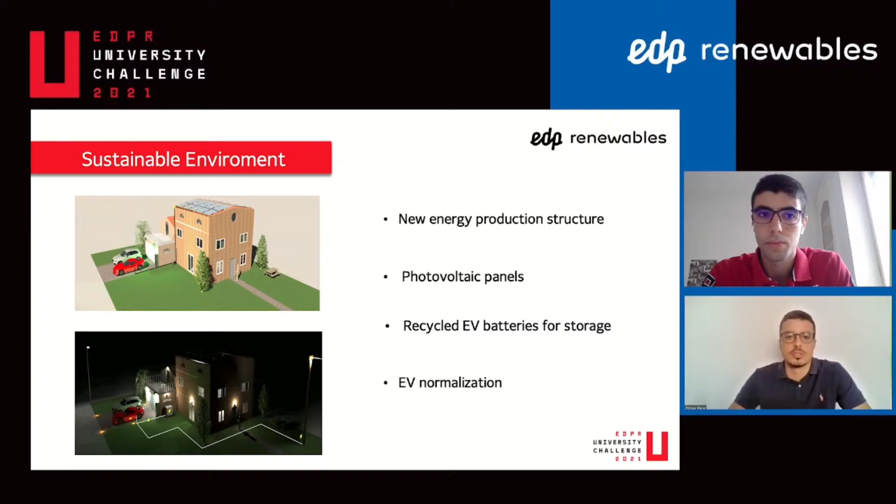Everyone, we are Javier Vázquez and Alonso Mena, students of Electronics Engineering and Marketing, and we are presenting our Smart EV Charger. First, this fits into the context of the growing market of renewable energy and electric vehicles. Our proposal is a new type of EV charger with capability to manage renewable energy and energy from the utility company, such as EDP. The system is also ready to incorporate an energy storage system, especially once recycled EV batteries penetrate the market.

This prototype has already been built and tested, and the hardware is ready to handle up to 2 EVs using different control strategies. The user can set the maximum power, up to 7.4 kilowatts, or decide to charge the vehicles with energy generated by solar panels. The user could also program the time period to charge, taking advantage of cheaper energy costs at night, for example. More complex solutions can also be developed in the field of Internet of Energy, like taking energy only from the home battery or limiting power according to the utility's preferences.

All these possibilities can be programmed with an interface panel at home. With this interface, the user can not only program the charge but also see the energy and power flow of the house. Communication between the charger and the interface is done via Wi-Fi through MQTT protocol. With this system, we can also measure and store user information in a database compatible with big data strategies. Our interface is already developed and running a demonstration program, with communication between the MQTT broker and the microcontroller of the charger.

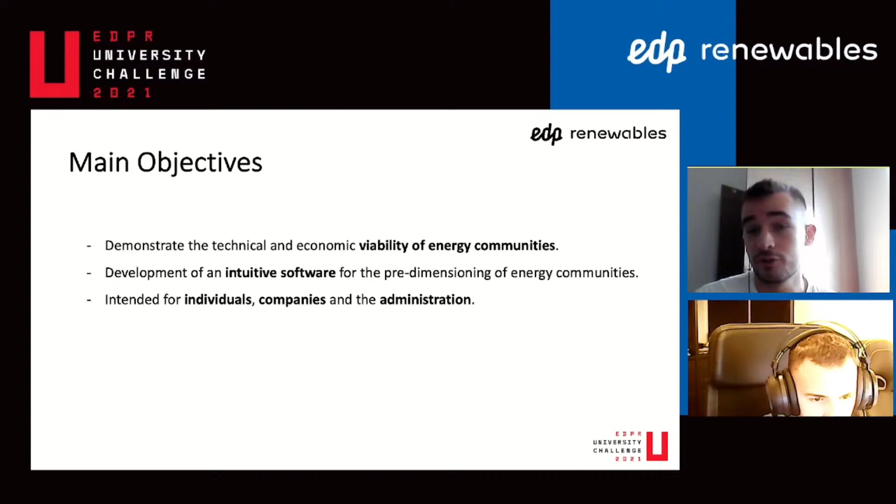ENCOM is programmed in the MATLAB environment, which allows generating a PDF report with the most significant energy and economic results from simple and intuitive data entry. The result report also provides data on the environmental benefits of implementing the energy community. This software is now applicable in Spain, on the Peninsular Territory and the Balearic Islands. The main objective is to minimize the payback years of the design of an energy community by optimizing the photovoltaic and storage system.

It's been possible to demonstrate through the software that implementing energy communities with a solar fraction of around 20% results in amortization years below the life of the installation, at least in situations without a storage system. The factors that most influence the variability of these amortization years are the location due to solar resource and climate, the price of energy, and efficiency strategies in consumption. For communities with a storage system, this currently represents a very high cost per unit of stored energy, which is one of the points for improvement in the future.

In the end, ENCOM software can be used by all people who want to join energy projects around an energy community, providing them with a simple and intuitive tool to check the energy and economic viability of these kinds of projects. Thank you very much.

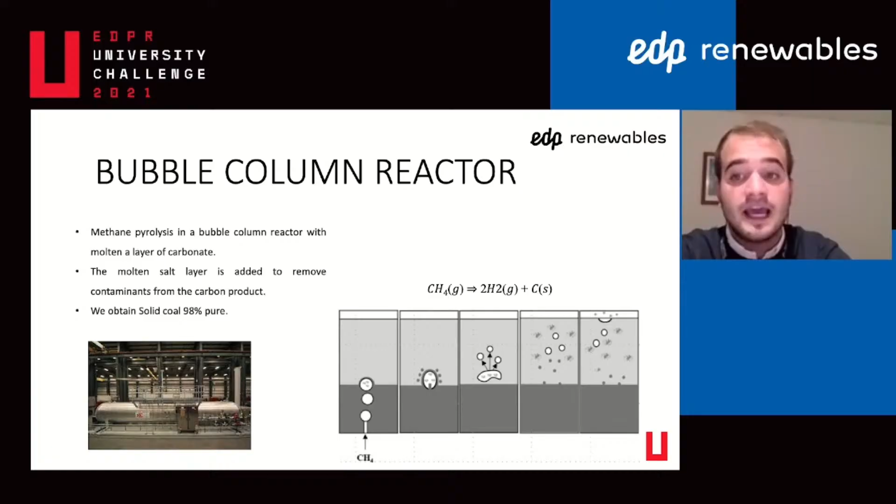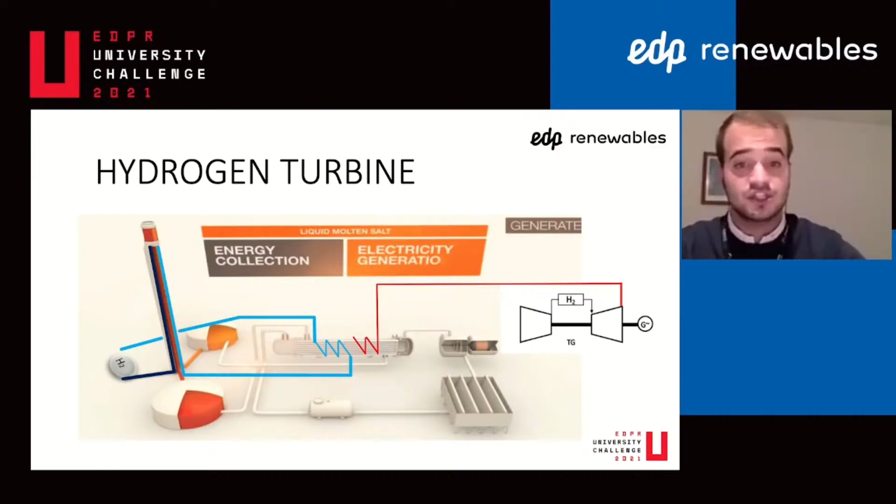To produce the hydrogen, the new plant scheme adds this new technology: the hydrogen connection with a tube-shell exchanger, and then the hydrogen turbine. We're also adding a hydrogen turbine to the system. With the hydrogen we produce, we can use it for 24/7 usage. This would be the new scheme with the hydrogen production and the new gas turbine.

In conclusion, we're producing hydrogen and carbon, coal.

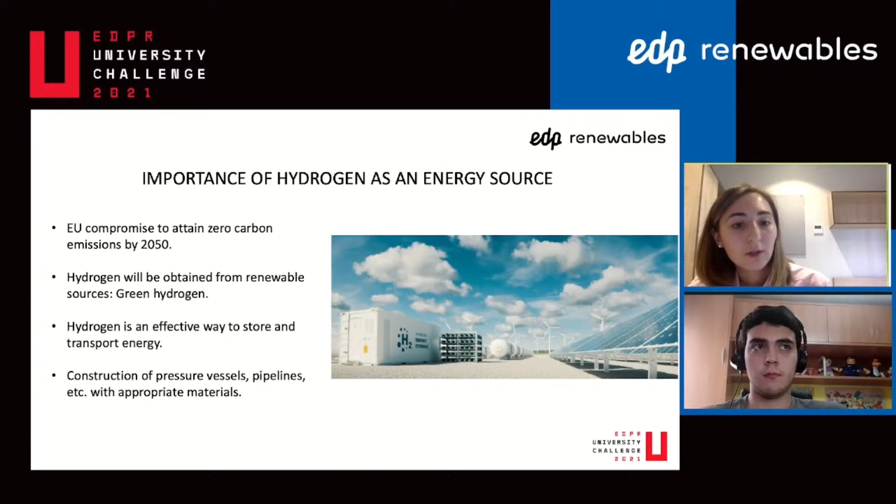This work was performed at the University of Oviedo. The European Union has decided to attain zero carbon emissions by 2050, and green hydrogen obtained from renewable sources will help achieve this goal. In this context, infrastructures to store and transport hydrogen must be constructed with appropriate materials.

Hydrogen atoms enter the structure of steel when it is submitted to high hydrogen pressure. They diffuse and accumulate in certain microstructural regions, giving rise to brittle failure under low stresses. Steels used to store hydrogen may need to be mechanically characterized in the presence of hydrogen.

There are different ways to introduce hydrogen into steels. One way is in-situ hydrogen charging tests under high pressure, but these are very expensive and only a few testing facilities exist. Another way could be performing mechanical tests on hydrogen pre-charged specimens, but these tests gave non-conservative results.

So we propose to perform in-situ tests using electrochemical hydrogen charging in an acid solution. Hydrogen content can be precisely controlled by means of the cathodic current density.

The qualification procedure for steels that work under high hydrogen pressures follows these steps. First, hydrogen saturation in the steel under the study pressure may be determined. Then the cathodic current density that introduces the exact same hydrogen content may be found. Finally, the selected mechanical test with simultaneous hydrogen charging under such conditions may be performed.

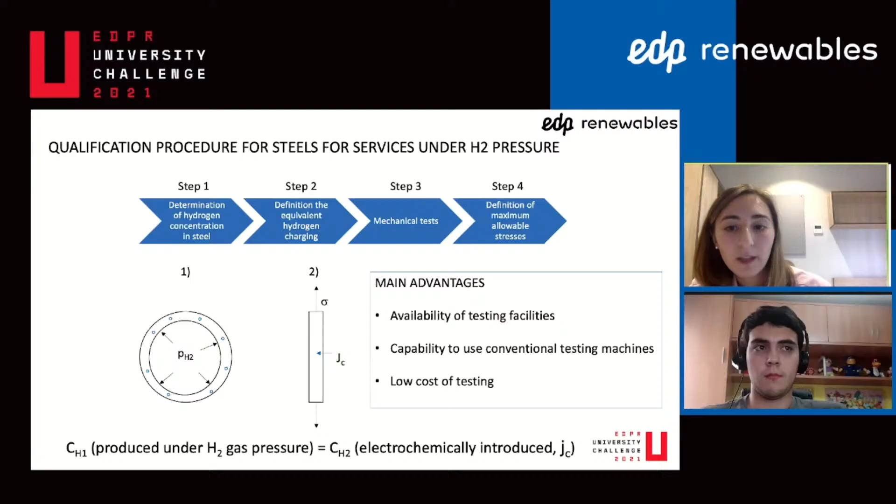Maximum admissible stress levels are determined. This operative procedure has low costs and is readily available, as it uses only conventional testing machines. Thank you.

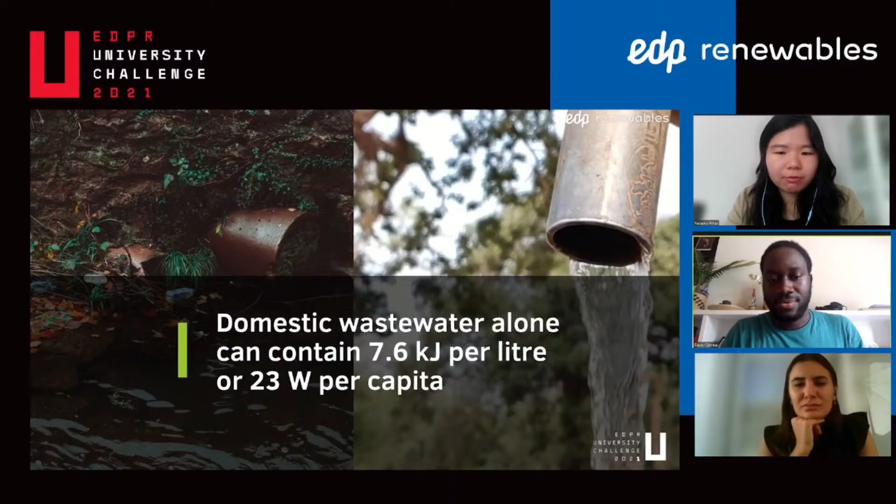They say renewable energy is the future, yet their intermittent nature and the difficulty to switch completely to electricity make them not perfect. Hydrogen is a clean energy vector that can support the transition into renewables, but our capacity is far behind our demand. On the other hand, we have an abundance of wastewater. It has been estimated that for every liter of domestic wastewater, up to 7.6 kilojoules of energy can be obtained.

We need sustainable ways to tap into this gold mine for the energy transition. Mother Nature provides us with a solution: microbes that break down organic sugars, releasing electric charge and hydrogen ions. In an electrolytic cell, with air as the cathode, the hydrogen ions recombine to create clean water. This is the microbial fuel cell.

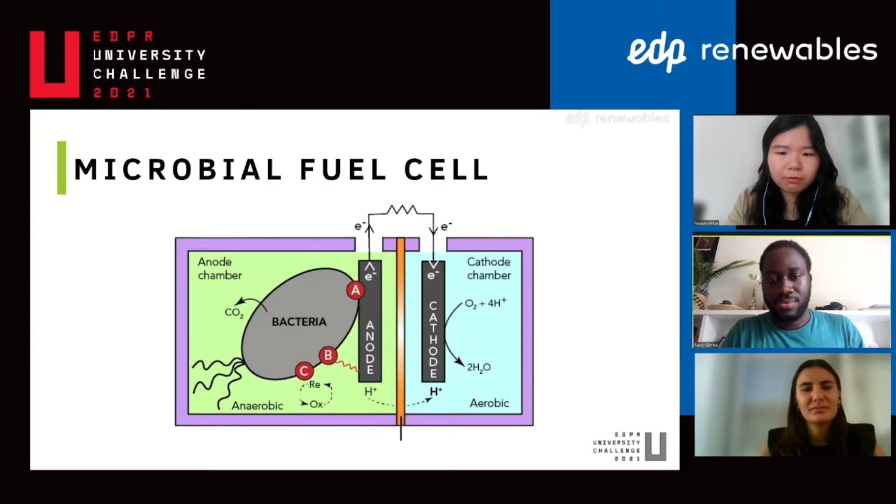Modifying this cell to trap hydrogen from the hydrogen ions creates a microbial electrolytic cell, an alternative to conventional electrolyzers, but this requires some additional electrical power.

Compared to worldwide utilities, our unique solution uses a combination of microbial fuel and electrolytic cells to produce green hydrogen from wastewater. The fuel cell provides the energy for hydrogen generation, making it completely energy independent.

This innovative characteristic allows us to reduce CO2 emissions, empower people through clean water production, and provide cheaper green hydrogen production. This is where EDP can participate in the hydrogen economy with lower capital and operating costs.

How do we know this? Our feasibility study shows that by selling the generated hydrogen, we get a payback of 6 years with an IRR of 9%. Also, the market has few competitors and is expected to grow to $18 million in 2025.

Together with us, this is the right moment for EDP to act and establish itself as the pioneer for waste hydrogen.

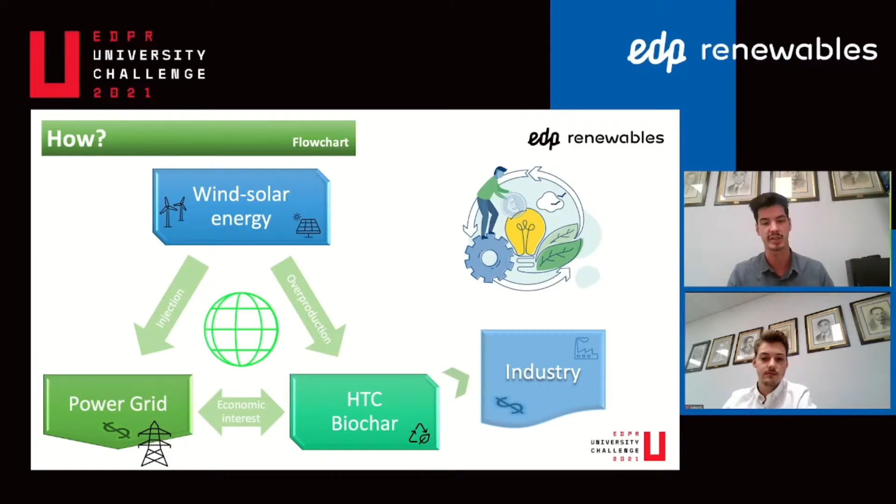The basis of the project is to support green energy and the circular economy without neglecting the environmental and social impact, providing maximum efficiency in all fields in order to move towards a better future.

With the research work, we conclude, we promote novel research lines tied to our innovative ideas and create a new viable business, both by improving the actual system and opening new horizons, always looking at minimum environmental impact and maximum land use sustainability. The solution boosts the local society and business and reduces external energy dependency, considering electricity prices nowadays.

As energy engineers, we acknowledge EDP's commitment to renewable energy and sustainability. We propose a solution to contribute to renewable energy share, knowing the future demands and the ongoing electricity dependency of society, especially as green produced electricity.

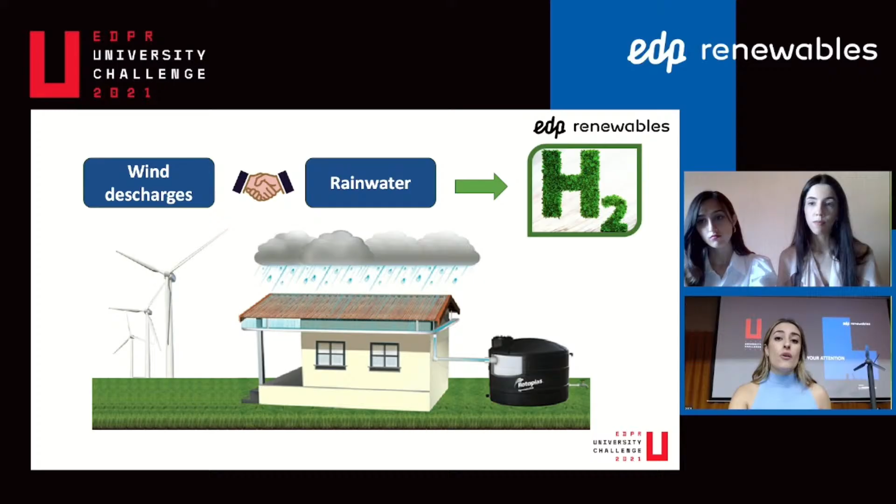Rainwater will be recollected in a building roof and stored in tanks. The wind energy excess is going to be used to produce the electrolysis process. This is how we are going to produce green hydrogen at a lower cost. We truly believe that our project is capable enough to be carried out in a short period of time with low investment and, of course, with incredible profit opportunities. Thank you for your attention.

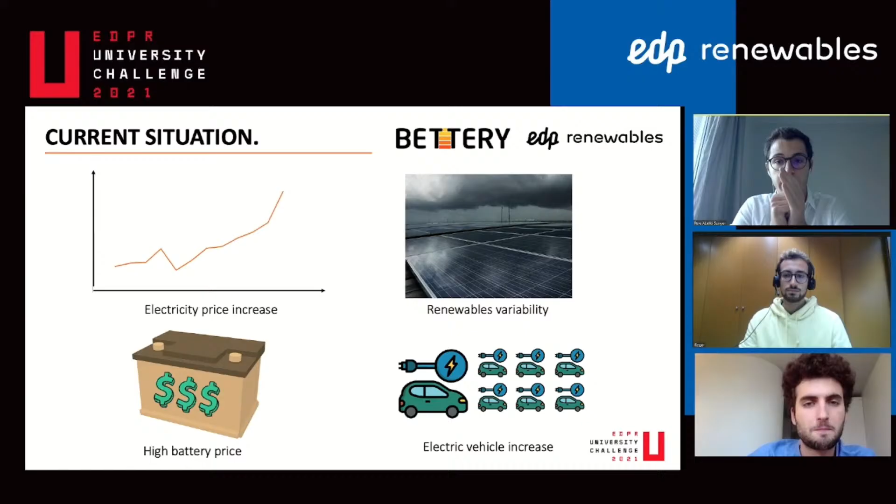We, the Bettery team, want to present to you an innovative method for taking advantage of the increasing renewable energy variability and the growing amount of electric vehicles on our roads. Listen carefully, because your electricity bill is about to get cheaper.

From Bettery, we're going to make all of this possible by means of this extremely simple business model. Investments will be made into purchasing and repurposing used electric car batteries that will be installed into our customers' households with no upfront costs. They will save on their bills by always consuming the cheapest electricity and will repay us via a monthly subscription fee.

Finally, leveraging our installed capacity in the form of a virtual power plant, the grid operators will be paying for the balancing services that we will be prepared to offer. As you may imagine, everyone is interested in saving money, so the potential battery market is wide. We will firstly be focusing on Spain and Portugal, but without losing sight of the whole European market. This is our team, and thank you very much for your attention.

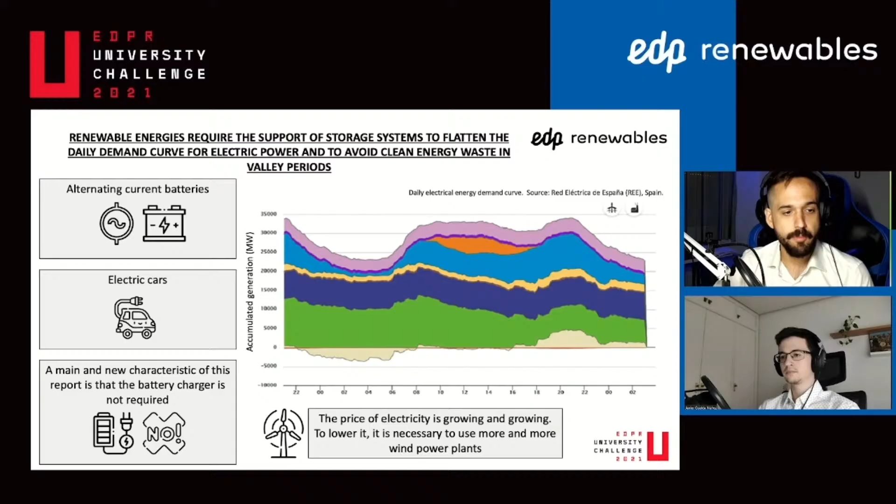Here, a distributed wind power storage system is proposed to avoid this energy loss by using alternating current batteries and also electric cars. A main and new characteristic of this report is that the battery charger is not required. The price of electricity is growing and growing. To lower it, it is necessary to use more and more wind power plants.

Alternating current batteries: an alternating current battery consists of a direct current battery connected to an inverter. During valley hours, the battery is charged at the expense of the network, and during peak hours, it injects energy back into the network again.

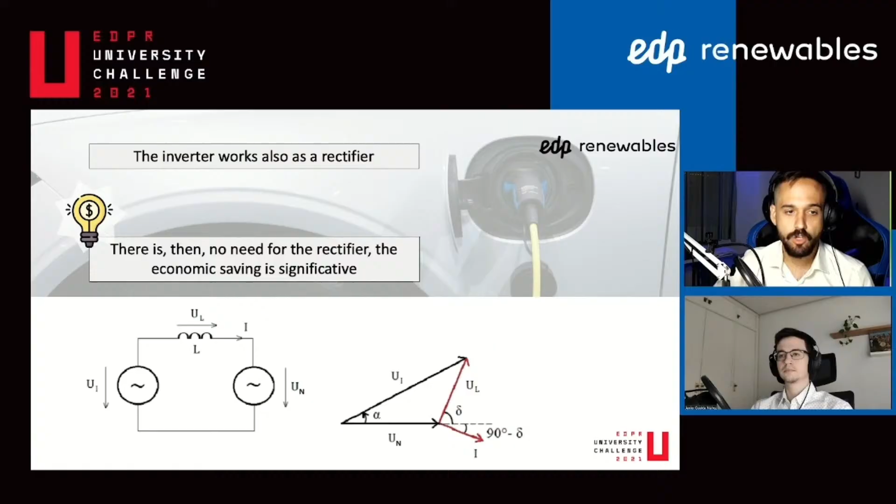Parallel connection: this is the basic scheme along with this phasor diagram. Alpha is the advanced angle of the inverter's voltage with respect to that of the grid. If alpha is greater than 0, the inverter works as such. If alpha is lower than 0, the inverter works as a rectifier. There is then no need for the rectifier. The economic saving is significant.

Implementation plan. The implementation plan is composed of two phases: prototype construction and laboratory testing to check the theoretical basis, and application. Initial promotion with advertising on TV, and the state will implement new electricity rates.

Conclusions. Distributed storage will take place in homes, industries, and shops. For storage, alternating current batteries and electric cars are used. The inverter is also going to work as a rectifier, avoiding the need for the latter. With this storage system for 1 million users, 3.5 power plants of 1,000 megawatts could be avoided.

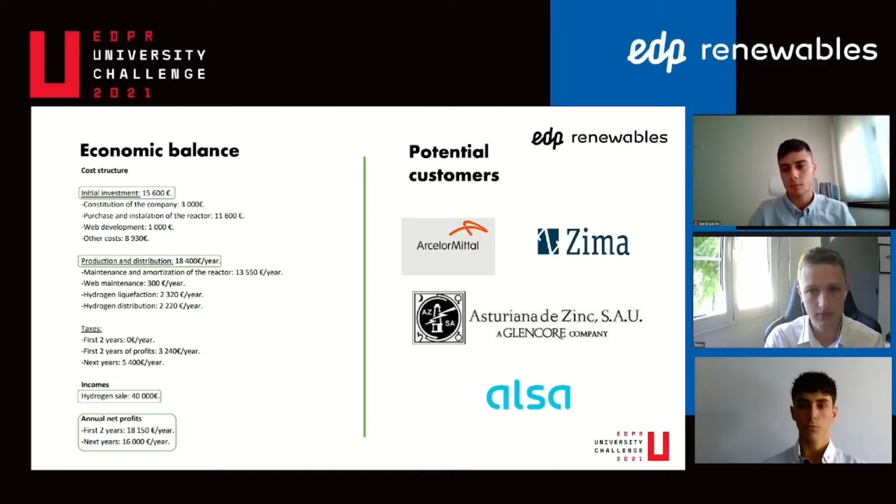Moreover, we would like to say that there are several potential clients that have publicly announced their interest in purchasing this type of energy. To sum up, our project began as a new way of generating green and renewable energy from a cheap and abundant type of waste, which currently has no productive use.

It requires a relatively low initial investment with a short payback period, and it would result in savings for plants. In addition to this, as future perspectives, we would also like to say that this technology could be applied and extended to other parts of our country, generating a greater amount of hydrogen while treating their sludge in a better way. And that's all. Thank you all for your attention.

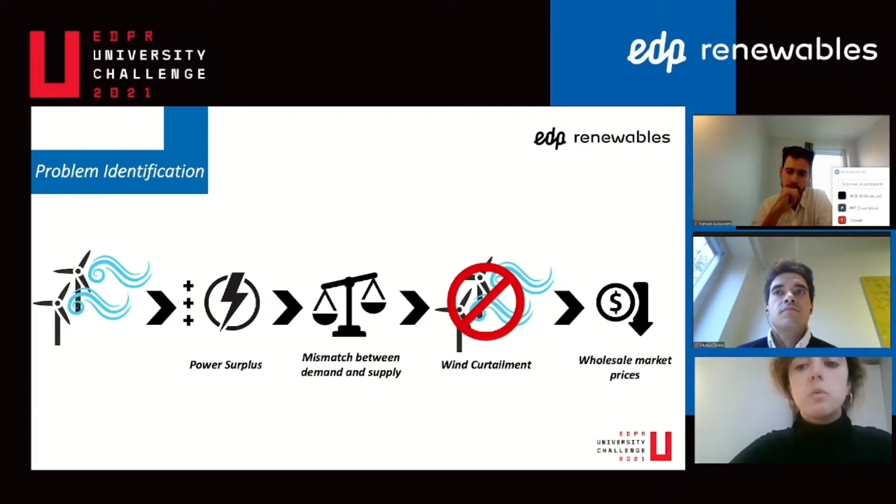The most common scenario is the overproduction of energy, which leads to wind curtailment and a decrease in market prices. Our solution to this problem is a model of a joint offshore wind farm with an alkaline electrolyzer and a solid oxide fuel cell. As such, the surpluses of the wind farm that would otherwise need to be curtailed would be used to produce and store hydrogen with the electrolyzer.

Then this hydrogen would be converted into electricity with the fuel cell when the demand is not satisfied. The model is based on a piece of code that determines when to convert the surplus of energy from the wind farm into hydrogen, and when to convert this stored hydrogen back into electricity.

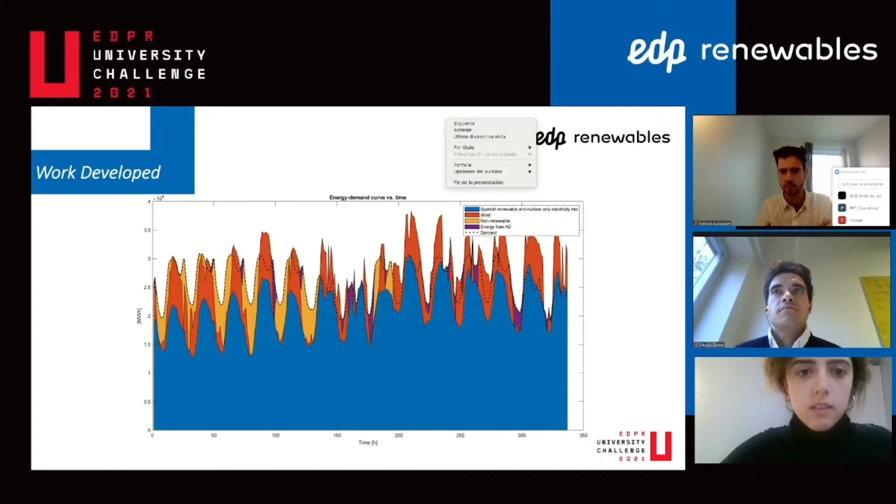Finally, this project will imply an 80% increase of renewables and a 6% decrease of non-renewables in the Spanish electricity mix. Moreover, the two LCOEs prove the economic feasibility of our project. Thank you very much for listening to this presentation.

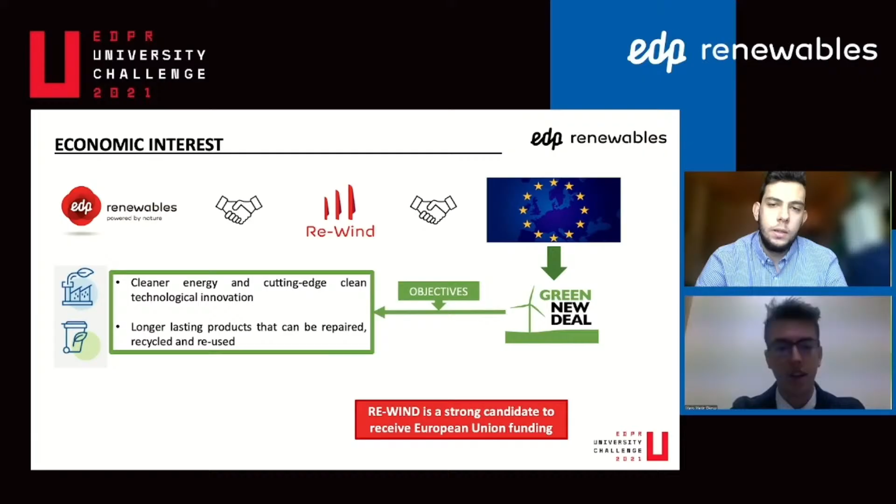Furthermore, this project could create a new market based on a circular economy while being a renewable energy source. Hand in hand with EDP, this project would be a strong candidate to receive European Union funding through the European Green New Deal, because Re-Wind is aligned with their objectives. In this way, we could significantly reduce the research and development costs this project could need. And we want to emphasize that the biggest cost of the project is the opportunity cost of not doing it. Thanks for your attention.

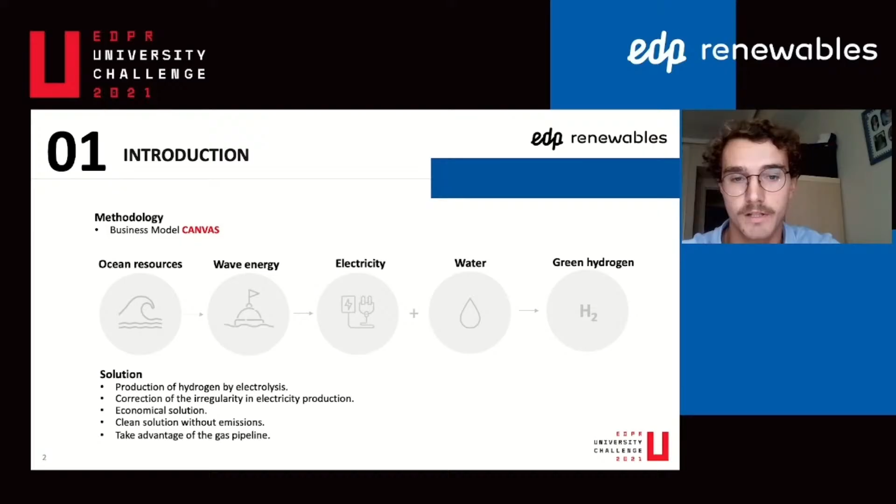So our solution is to use this electricity for the production of green hydrogen. By this, we correct the irregularity in electricity production, and we offer an economical and environmentally friendly solution, and we can take advantage of the gas pipelines to transport the hydrogen.

This is the case study we have done on the coast of Galicia in Spain. We have made an estimation of the annual energy production, taking into consideration the number of buoys, their capacity, their disponibility factor, having a value of 7,190 megawatt hours, that with the electrolysis considered, produces 131 tons per year of hydrogen.

So with this, hydrogen could be used for industrial, transport, portable devices, or large-scale applications. So the project's attraction comes from its competitive price in the market and its low environmental impact. Furthermore, it will improve over time with upcoming investigations, development, and innovation of the technology.

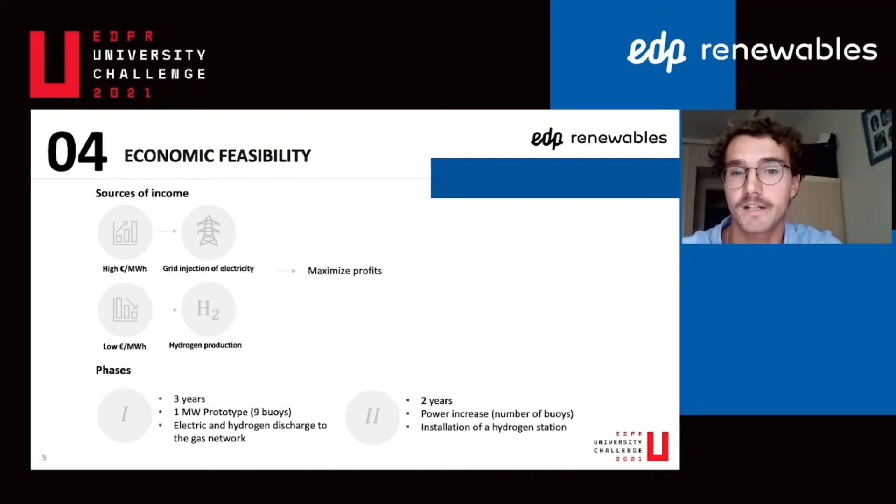In fact, the project is even more profitable when we combine the use of electricity with the production of hydrogen, and for injecting it into the grid depending on the electrical system necessities. We can see as well a prediction of the two implantation phases in 3 and 2 years. Finally, these are our conclusions.

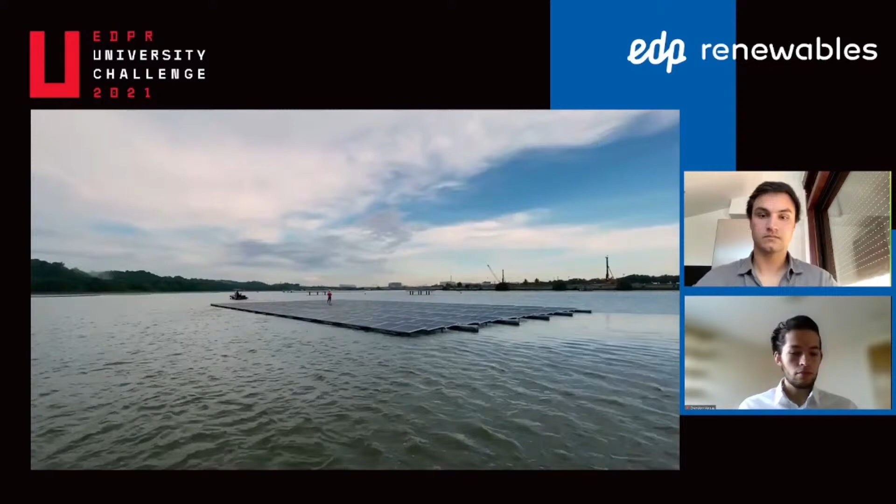A new energy concept is proposed to integrate different renewable energy sources to support net zero carbonization, to accelerate energy transition, and to increase energy system flexibility and sustainability. This innovative solution is a hybrid four renewable energy network, Hy4Ren. In order to have a 100% renewable energy friendly world, we need all renewable energy sources to work together. Hy4Ren combines hydropower and pump storage, floating solar PV, wind power, wave energy, and energy storage in batteries. In this industry, this is a complete game changer. It's the first project of this type in the world. It is completely eco-friendly, modular, scalable, and versatile. Hy4Ren, the best of 4 energy sources.

We are Hy4Ren, and we're here to present our new integrated energy solution. There's no point in presenting a solution as elegant as ours if there's no problem to be solved. We intend to address the biggest issues that we face nowadays: centralization of energy generation, fossil fuel dependency, and the intermittency of energy supply from renewable sources.

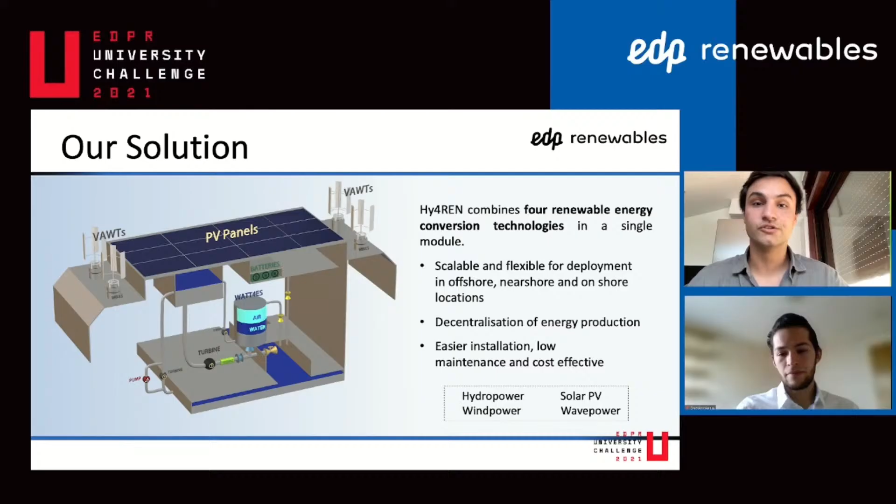As seen in the video, our project consists of a combination of 4 renewable energy conversion technologies. We offer the client a scalable and flexible solution, a low maintenance and cost-effective hybrid solution that allows the user to be fully independent from the grid. Among the several benefits, we highlight the very low investment, the option to decarbonize energy-intensive industries, and also possible applications in desalinization and hydrogen production projects.

We are Hy4Ren, and we want you to help us build the future with this modular solution of today. Thank you.

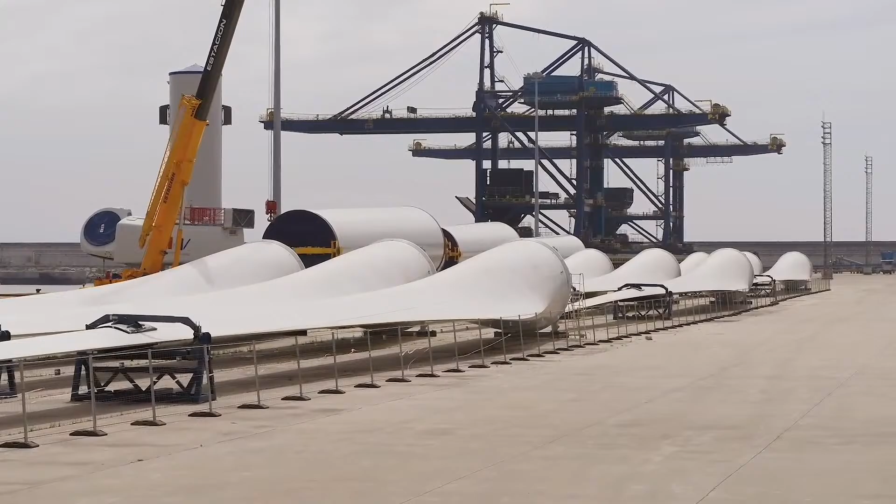The Wind Float Atlantic project, formed by Ocean Winds, Repsol and Principle Power, is the first floating wind farm in continental Europe, just off the coast of Viana do Castelo.

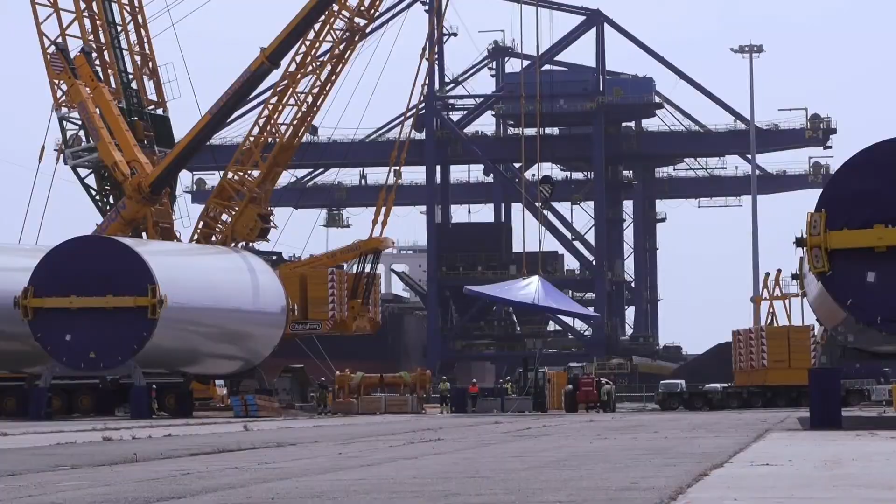This floating wind farm will allow the optimization of natural resources and will speed up the commercial deployment of this innovative technology. Wind Float Atlantic is an example of a more sustainable future for mankind, with the largest turbines ever installed on floating platforms. The total installed capacity of 25 megawatts will provide sufficient energy to 60,000 people throughout the year. This energy promises an endless source.

The potential of wind is immense, and this renewable energy is an essential part of the worldwide decarbonization strategy, free of CO2 emissions. The Wind Float Atlantic project is the future we envision.

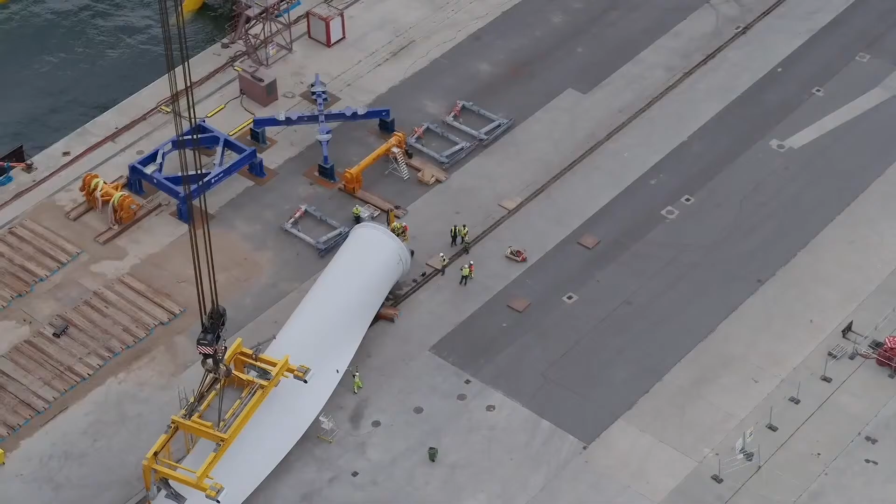Our mission has begun, and we will continue to nurture the power of nature to make our planet more sustainable. This is the beginning of a new era committed to enabling a better future.

Wind Float Atlantic. Energy beyond the horizon.

The world has changed. I feel it in the water. I feel it in the earth. I smell it in the air. A new power is traveling all around the earth. A clean and infinite energy in constant renovation that comes from natural sources such as the sun, the wind, and the human will.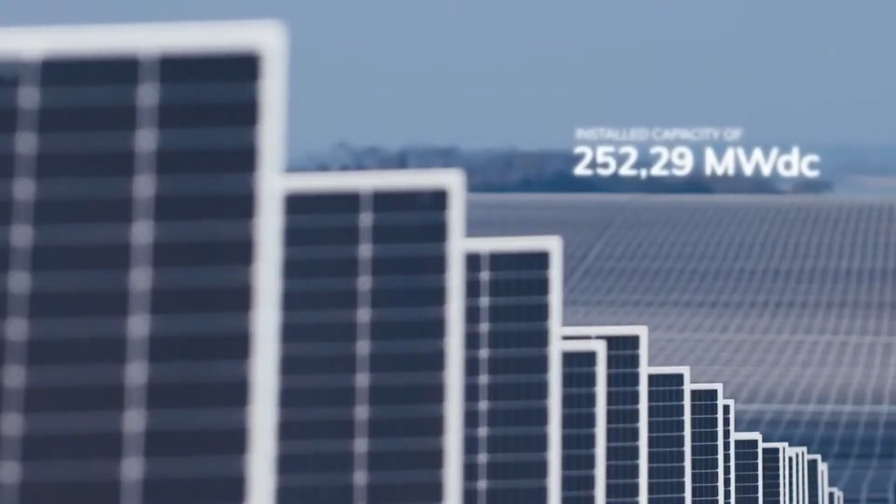EDP Renewables is launching the company's latest solar complex in Brazil. Pereira Barreto Solar Complex is the largest in operation in São Paulo State and the 5th largest in Brazil. The complex covers a total of 455 hectares.

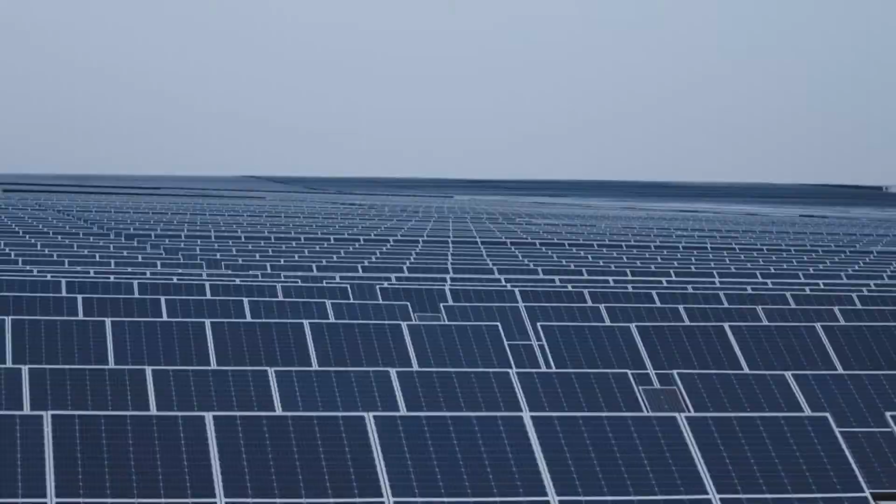The complex can generate up to 547,000 megawatt-hours per year. That's enough to power a city of approximately 750,000 people. In just 1 year, the photovoltaic complex will stop more than 150,000 tons of CO2 from being emitted into the atmosphere. It'll also make a lasting contribution to the region's social and economic development.

At EDP, we believe that a sustainable future begins with the choices we make today. And we're changing tomorrow now.

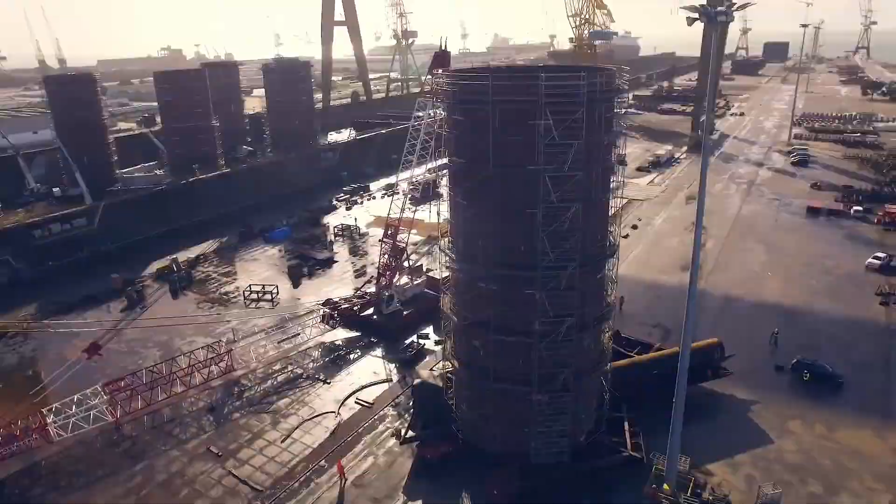This is a new way of generating energy and an important step to fight against climate change.

Portugal enters a new era with an internationally acclaimed solution in the production of offshore renewable energy. The Wind-Float Atlantic project, formed by Ocean Winds, Repsol and Principle Power, is the first floating wind farm in continental Europe, just off the coast of Viana do Castelo.

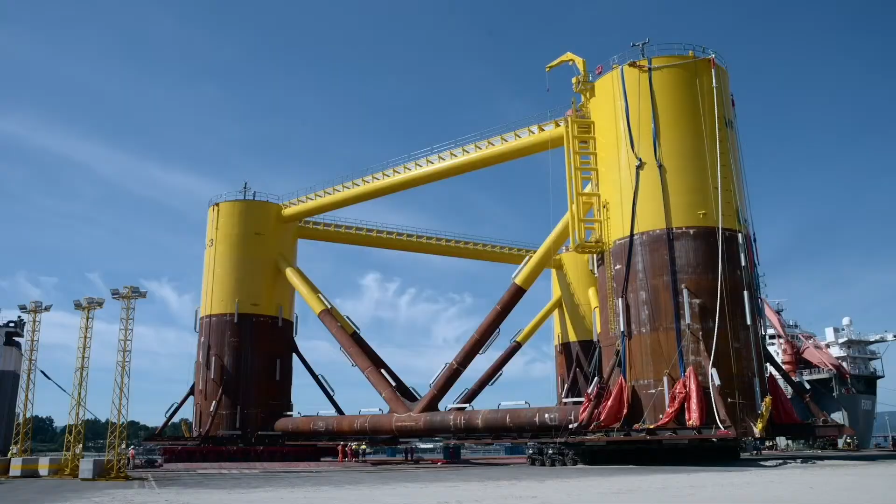This floating wind farm will allow the optimization of natural resources and will speed up the commercial deployment of this innovative technology. Wind-Float Atlantic is an example of a more sustainable future for mankind, with the largest turbines ever installed on floating platforms. The total installed capacity of 25 megawatts will provide sufficient energy to 60,000 people throughout the year.

This energy promises an endless source. The potential of wind is immense, and this renewable energy is an essential part of the worldwide decarbonization strategy, free of CO2 emissions. The Wind-Float Atlantic project is the future we envision.

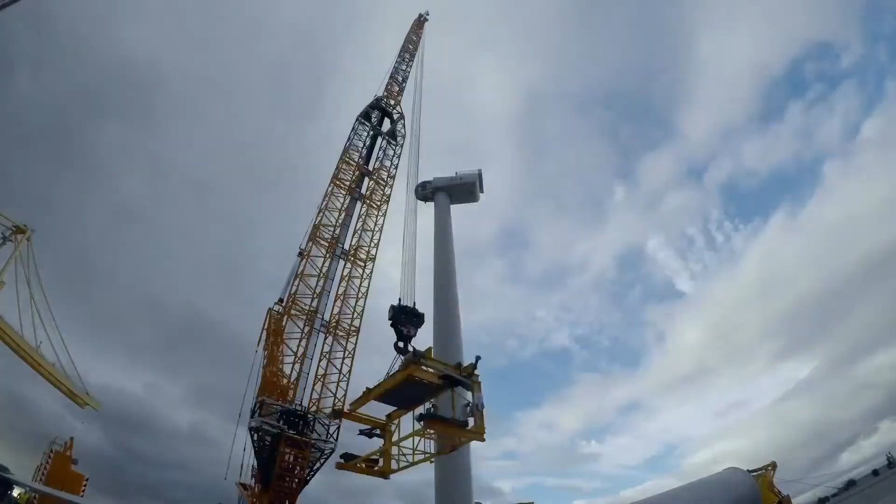Our mission has begun, and we will continue to nurture the power of nature to make our planet more sustainable. This is the beginning of a new era committed to enabling a better future.

WindFloat Atlantic. Energy beyond the horizon.

The world has changed. I feel it in the water. I feel it in the earth. I smell it in the air. A new power is traveling all around the Earth. A clean and infinite energy in constant renovation that comes from natural sources such as the sun, the wind, and the human will.

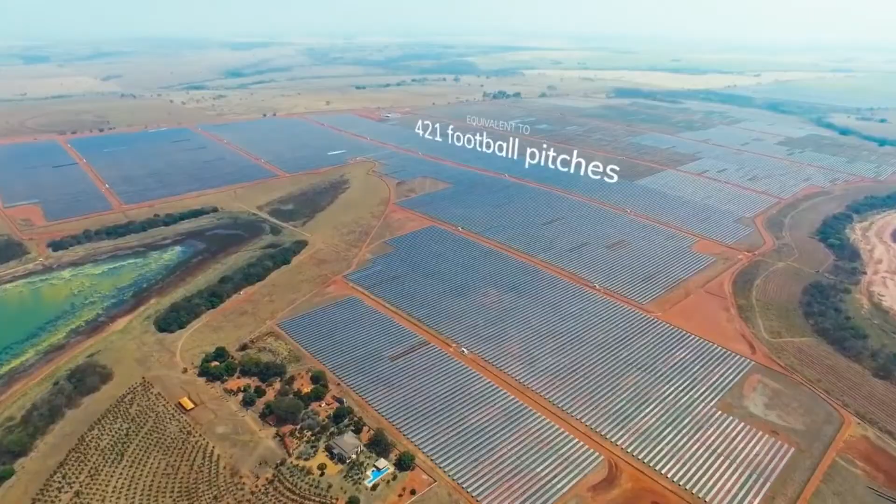EDP Renewables is launching the company's latest solar complex in Brazil. Pereira Barreto Solar Complex is the largest in operation in São Paulo state and the 5th largest in Brazil. The complex covers a total of 455 hectares and can generate up to 547,000 megawatt-hours per year.

That's enough to power a city of approximately 750,000 people. In just 1 year, the photovoltaic complex will stop more than 150,000 tons of CO2 from being emitted into the atmosphere. It'll also make a lasting contribution to the region's social and economic development.

At EDP, we believe that a sustainable future begins with the choices we make today. And we're changing tomorrow now.

This is a new way of generating energy and an important step to fight against climate change. Portugal enters a new era with an internationally acclaimed solution in the production of offshore renewable energy.

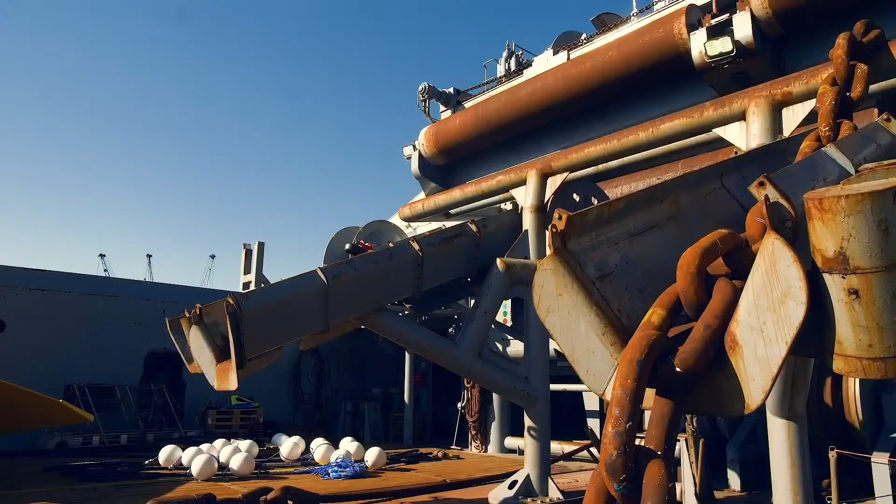The WindFloat Atlantic project, formed by Ocean Winds, Repsol and Principle Power, is the first floating wind farm in continental Europe, just off the coast of Viana do Castelo.

This floating wind farm will allow the optimization of natural resources and will speed up the commercial deployment of this innovative technology. Wind Float Atlantic is an example of a more sustainable future for mankind, with the largest turbines ever installed on floating platforms. The total installed capacity of 25 megawatts will provide sufficient energy to 60,000 people throughout the year.

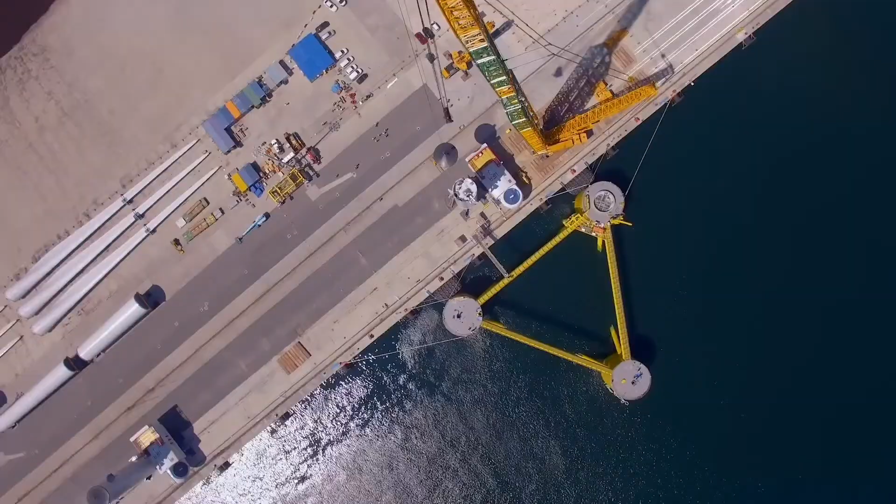This energy promises an endless source. The potential of wind is immense, and this renewable energy is an essential part of the worldwide decarbonization strategy, free of CO2 emissions. The WindFloat Atlantic project is the future we envision.

Our mission has begun, and we will continue to nurture the power of nature to make our planet more sustainable. This is the beginning of a new era committed to enabling a better future.

WindFloat Atlantic. Energy beyond the horizon.

Pereira Barreto Solar Complex is the largest in operation in São Paulo state and the 5th largest in Brazil. The complex covers a total of 455 hectares and can generate up to 547,000 megawatts-hour per year. That's enough to power a city of approximately 750,000 people.

In just 1 year, the photovoltaic complex will stop more than 150,000 tons of CO2 from being emitted into the atmosphere. It'll also make a lasting contribution to the region's social and economic development. At EDP, we believe that a sustainable future begins with the choices we make today. And we're changing tomorrow now.

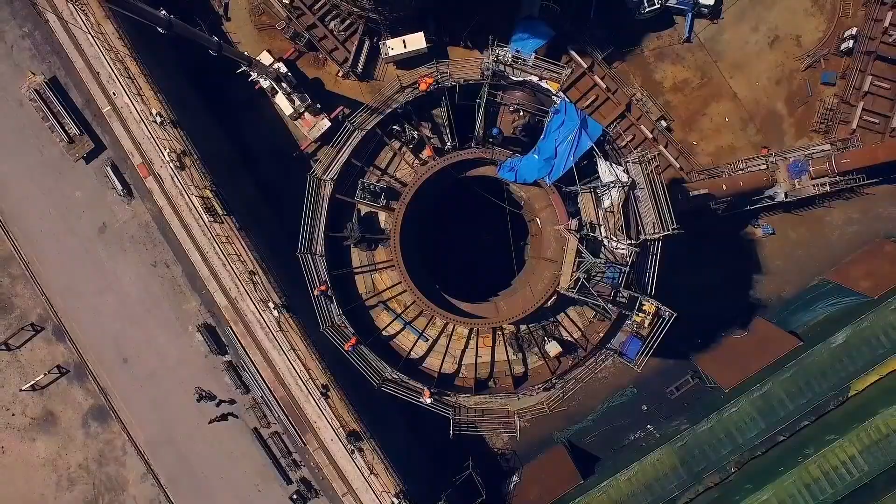This is a new way of generating energy and an important step to fight against climate change. Portugal enters a new era with an internationally acclaimed solution in the production of offshore renewable energy.

The WindFloat Atlantic project, formed by Ocean Winds, Repsol and Principle Power, is the first floating wind farm in continental Europe, just off the coast of Viana do Castelo.

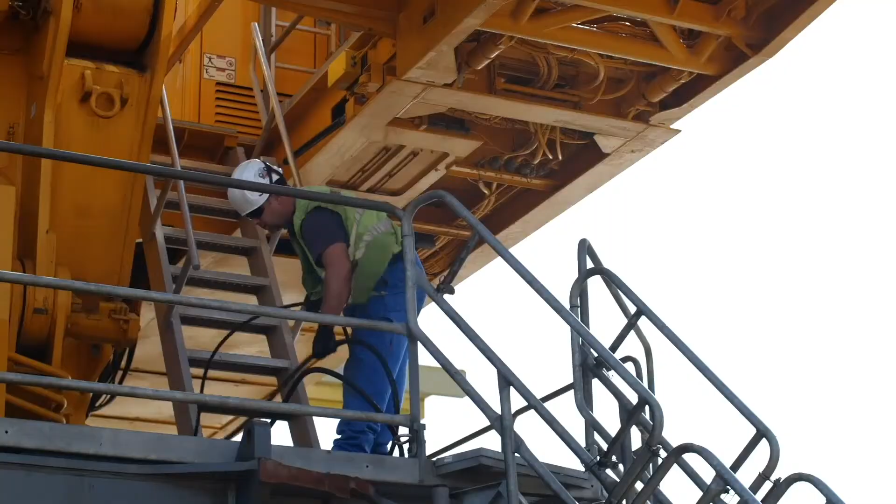This floating wind farm will allow the optimization of natural resources and will speed up the commercial deployment of this innovative technology. WindFloat Atlantic is an example of a more sustainable future for mankind, with the largest turbines ever installed on floating platforms. The total installed capacity of 25 megawatts will provide sufficient energy to 60,000 people throughout the year.

This energy promises an endless source. The potential of wind is immense, and this renewable energy is an essential part of the worldwide decarbonization strategy, free of CO2 emissions. The WindFloat Atlantic project is the future we envision.

Our mission has begun, and we will continue to nurture the power of nature to make our planet more sustainable. This is the beginning of a new era committed to enabling a better future.

WindFloat Atlantic. Energy beyond the horizon.

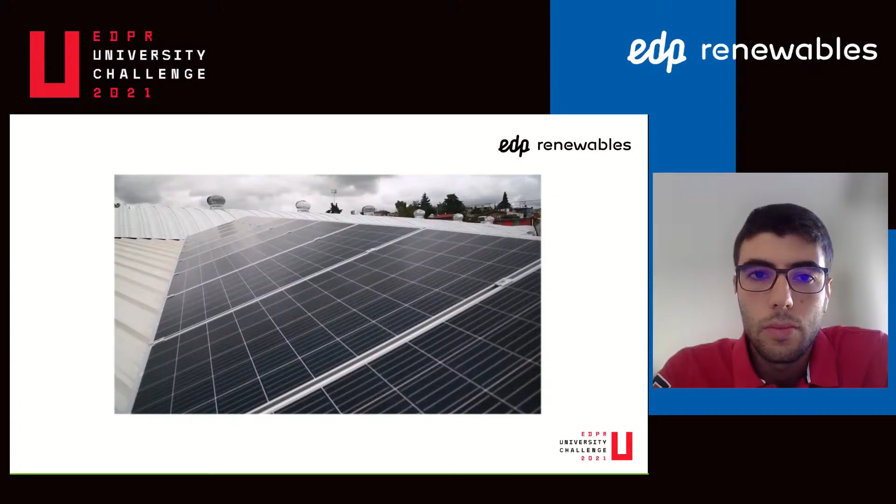In the next years, the way we produce energy is going to completely change. It's already well known the profitability of installing solar panels at home, profitability that will increase in the short term with the cheaper cost of panels and the penetration in the market of recycled EV batteries for storage. Although big-scale energy production will always be necessary, most homes and small local consumers will follow this structure and play a main role in the production of energy. This extraordinary change is a trend we cannot miss, and that's why we present our smart EV charging point.

Our project is not just to develop a simple EV charger. We want to go beyond and create a whole system of energy management for the home. How are we going to achieve this? Well, we measure at every moment the energy generated by the photovoltaic panels and the energy consumed by the house and the EVs, so we can use different control strategies according to this information, always in the field of Internet of Energy. We want the user to be aware and decide about the production and distribution of this energy.

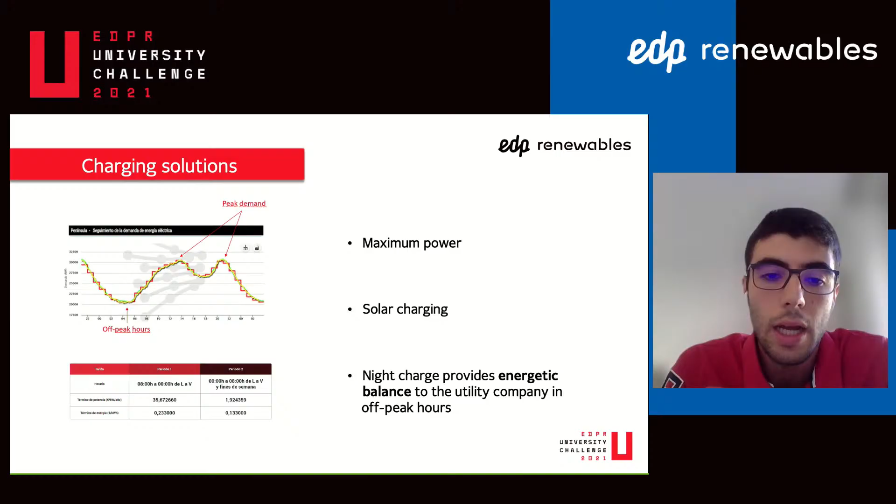So far, we have implemented 3 different charging modes. In the first one, the user can set the maximum power, always up to 7.4 kilowatts. The user could also decide to charge only with the solar energy generated on his roof, with the solar charge. A periodic charge is implemented as well, for routines or night charge, which is a perfect solution both for the user, who takes advantage of the cheaper cost of energy at night, and for the utility company to balance the grid load during off-peak hours.

More complex charging possibilities can be developed in the prototype as well. For example, if both cars are charging, we could balance the energy given to them depending on their state of charge, so the one with lower battery will receive more power.

A home storage battery can also be implemented in the structure. With this change, we could take the energy from the battery using different structures, always covering our needs.

And we could also adopt in the future bidirectional charge, adopting vehicle-to-grid or vehicle-to-home technologies, where our vehicle is now the one who gives the energy to power our home. To summarize, endless possibilities can be developed using smart grid techniques.

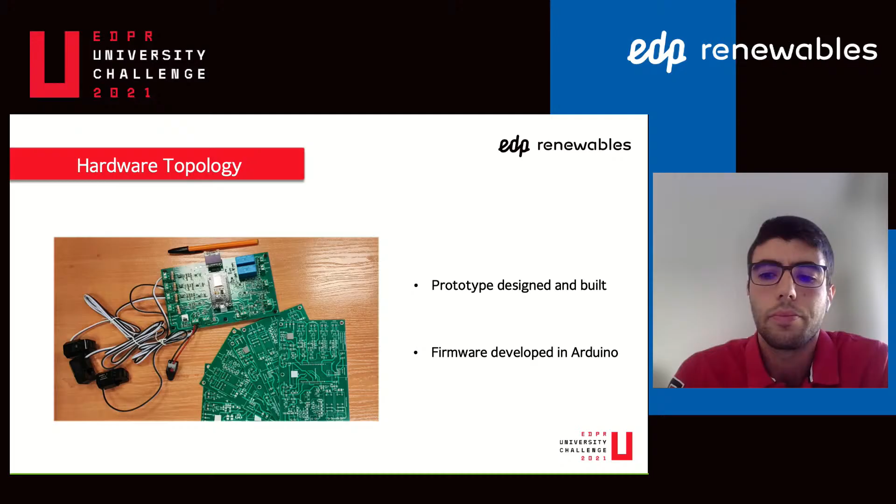We have developed an interface panel that the user would have at home. This interface is wirelessly connected to the charger, and with it, the user can initiate or finish the charge, as well as program the different control strategies of the charger.

But not only that, on the screen it is also displayed the energy flow of the house, so the user is aware at every moment of the energy production and consumption of his house. This interface is very intuitive, suitable for all kinds of users, even the ones who have low knowledge in the subject.

To communicate the charger and the interface, we have chosen MQTT protocol, transmitted via Wi-Fi, which is perfect for projects of Internet of Things. So far, we have a demonstration program running between the interface and the charger, both connected with an MQTT broker that we have installed, and this broker organizes the communication in both directions.

The system is also ideal to store information of power consumption and charging routines, so multiple big data applications can be implemented. The next step would be to develop a mobile app with the same features as the interface, but so the user doesn't have to be at home. This app would be connected also to the same MQTT broker, having communication with both the charger and the interface.

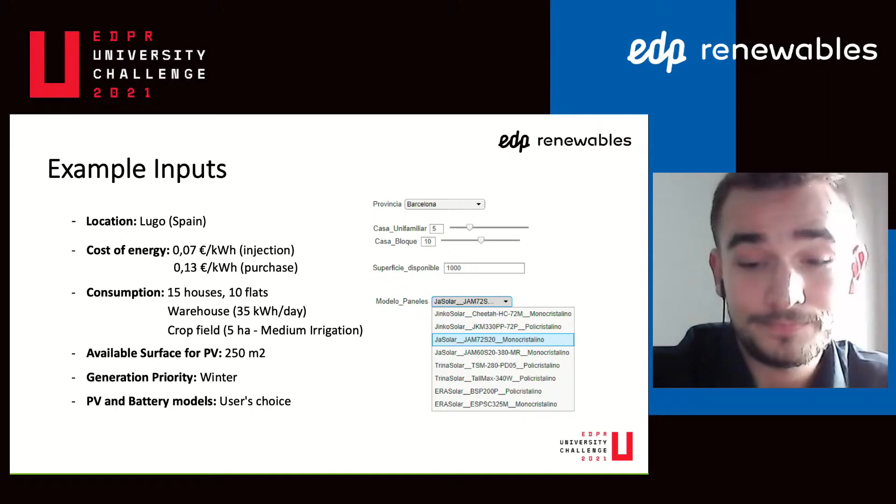With the models of batteries and solar panels already defined, it results in 9.5 years of amortization of the installation, taken as the best option to have a storage system in this case. Apart from these results, all the results offered by the software, including this graphic, are presented in a PDF report.

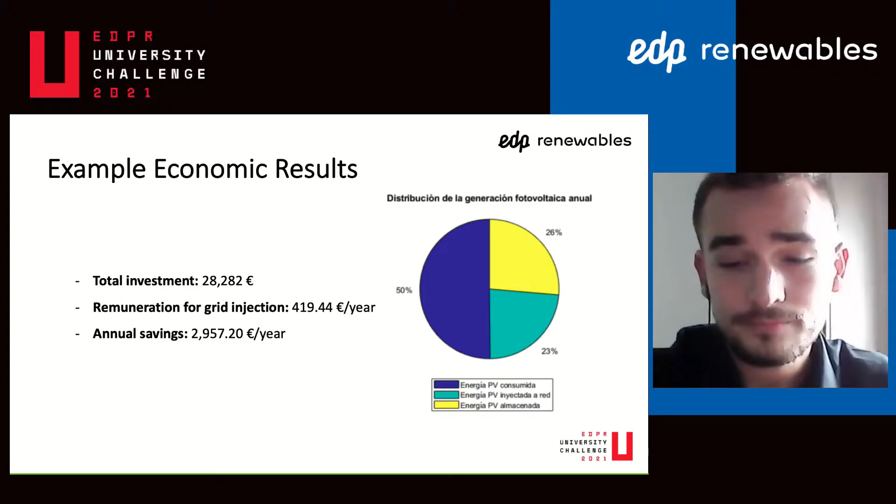3,000 euros per year. The savings in CO2 emissions thanks to the implementation of the community is about 3.5 tons of CO2 per year. This graphic is also available in the results report.

The factors that most influence the viability of these amortization years are the location, due to the solar resource and climate, the price of energy, and the efficiency strategies in consumption.

In the end, ENCOM software can be used by anyone who wants to join energy projects around an energy community, providing them with a simple and intuitive tool to check the energy and economic viability of these kinds of projects. Thank you very much for your attention, and from all the group, thanks also for this opportunity. If you have any questions.

Thank you. And yeah, any questions from the jury?

I have, well, first of all, congratulations for your nice project. I have a question concerning the financials of your project. You presented an estimate of costs. Can you please indicate how you could reach those estimate of costs?

Of course. As I said, we have a database with different models of batteries and solar panels, so depending on the model, we take one cost or another. Then for the inverters, regulators, and other electrical machines, we did a market study and made a graphic that defines the power of those machines with the price depending on the power. So depending on the size of the community or the installation, we reach one price or another. And then for the cost of the construction of the community and all these things, we used typified models, all referenced in the project.

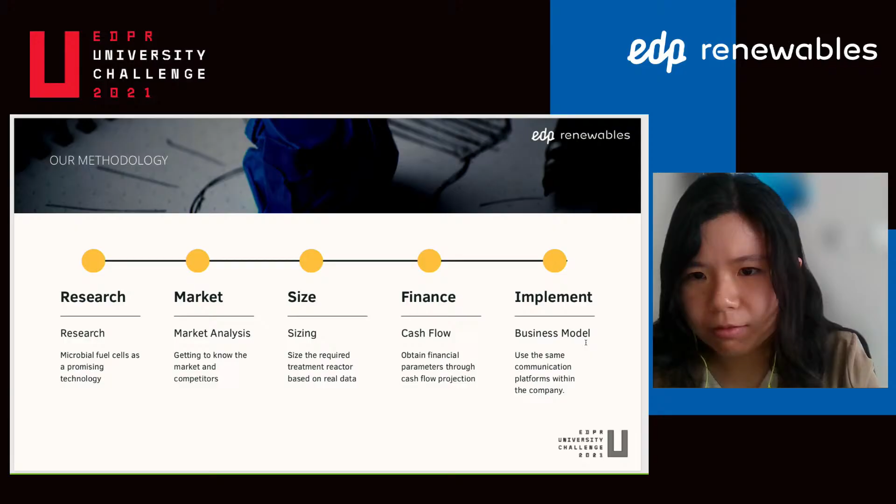Our proposed technology is composed of two cells: the microbial fuel cell and the microbial electrolysis cell. With the help of microorganisms, we are able to break down wastewater into hydrogen, which requires very little energy. It only requires 0.11 volt of energy input, which is less than 10% of what a regular electrolyzer requires to produce one molecule of hydrogen.

Now, when we compare these hydrogen generation technologies with the others... sorry, the slide is not working.

Okay, now when we compare it with the other technologies, we can say it's the most innovative. Why? Because it has a low energy input and therefore the highest efficiency for hydrogen generation. We see it has the most potential for both industrial and domestic use, and it is a niche market that is open to disruption.

So what makes our technology unique? We would like to highlight three main points here. First, as mentioned in our previous slides and also the 2-minute pitch, is the ability to be energy independent. By combining the two cells, the fuel cell is able to provide the energy for the hydrogen generation, sustaining itself.

Next, the technology is sustainable in many points of view. It has less energy losses, and also it uses wastewater as fuel itself, tackling global issues of waste. Third, it is not location dependent, so it can be implemented anywhere, including rural and remote areas.

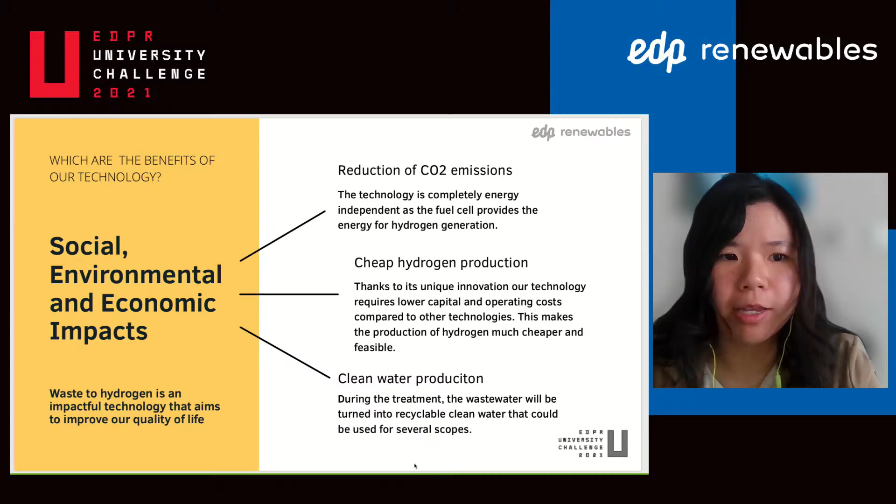Economically, we are able to produce green hydrogen much cheaper than today's common technologies, which will be explained further in the financing study. Socially, with this clean water production, which can be implemented in rural areas, people's well-being will be improved. Now let's dive into our case study.

To validate our business idea, we considered how EDP could work with Barcelona's Baix Llobregat wastewater treatment plant by replacing part of their current capacity with our technology. First, we calculated the amount of potential energy available based on the current system capacity. Then we tried to size the reactor based on the technology available and do a cash flow model from there.

The results of our cash flow projection show that with a capacity of 15,000 cubic meters per day from the wastewater plant, we can achieve a payback period of 6 years and an internal rate of return of 9%. I would like to highlight the levelized cost of hydrogen is 2.8 euro per kilogram, while according to NREL, the average LCOH nowadays is 3.8 euro per kilogram.

Taking a look at this growing global microbial fuel cell market, currently existing players in this market have small scale. So this is where EDP can come in, upscaling pilot projects into industrial scale applications.

Our business proposal to EDP is to use waste to hydrogen. EDP can offer hydrogen as an energy vector, which will be cheaper and also less energy intensive. The hydrogen can be sold to sectors that are hard to electrify, such as transportation or existing chemical industries that use hydrogen. A key partner here in the business model is the wastewater treatment plants, where the reactors will be placed.

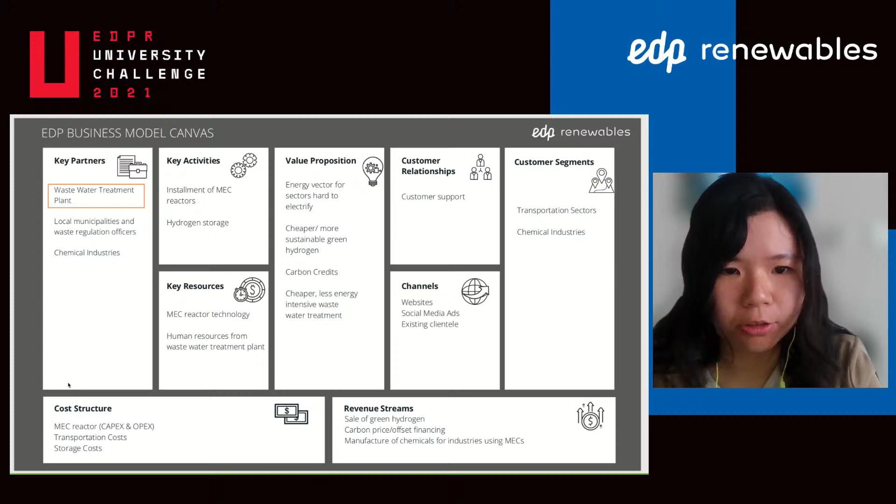So the initial cost that will be required is the reactor itself, transportation and storage costs for the hydrogen. From there, we can already sell green hydrogen as the main revenue. Thank you very much. Time's up.

Members of the jury, any questions for this team?

Yes, I have a question. My question regards the balance between the amount of power of electricity demanded by a conventional electrolyzer versus this microbial fuel cell. So what amount of electricity is less necessary?

Yes, so based on the literature review we did, they compared electrolyzers and the microbial fuel cell. It requires much less energy because the microbial fuel cell gives the initial electricity input. Once it's inputted, it can sustain itself afterwards because the fuel cell gives energy to the electrolysis cell. So they complement each other and sustain afterwards, which is why it can be much less than regular electrolyzers that require full electricity to break down water into hydrogen molecules all the time. That's the main difference.

And can you provide us with some estimates about this reduction in electricity versus the conventional electrolyzer? Our data here says it's 0.11. Sorry, if I get your question right, you're comparing our technology with general electrolyzers, right? Exactly, the voltage input. So here we have 0.11 volt for our technology, and for regular ones it's 1.1 volt, more or less.

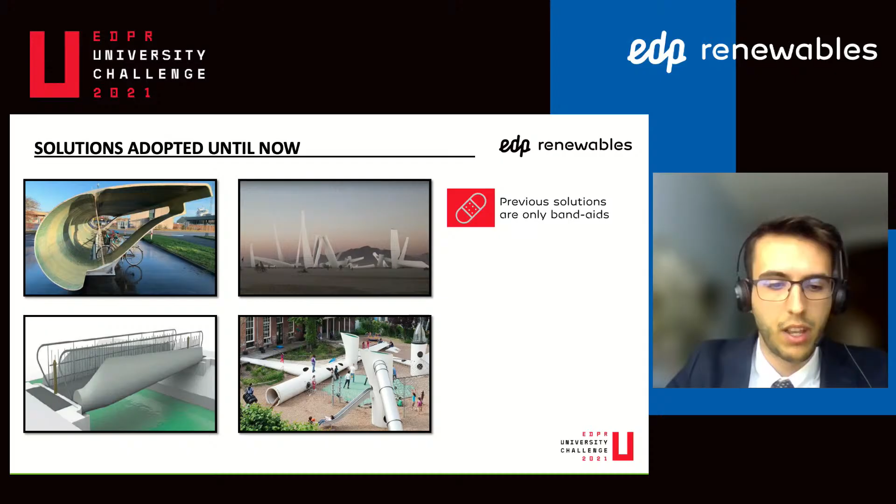Aware of the problem, efforts have been recently made to find uses for what is usually considered waste material. These solutions, although ingenious, are only band-aids due to the enormous amount of residue that will be produced. A large-scale, long-term solution must be found to reduce the unrecyclable wind turbine blades.

The industry acknowledges this, and that is exactly what our project aims to tackle, offering a solution based on the circularity of wind energy technology by using wind turbine blades for further generation of electricity. Rewind uses the waste as an opportunity to keep generating value.

Based on the governing equations of fluid dynamics, when a fluid hits an obstacle, von Karman vortices are generated with a specific frequency which solely depends on the wind's speed.

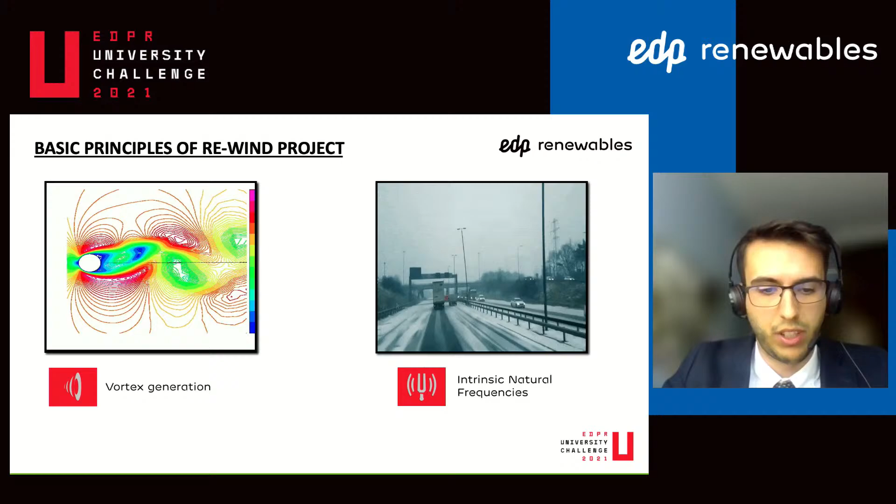For the second one, I'm sure you've heard about the Tacoma Narrows Bridge, and this occurs because any object, such as the street lights in this video, has an intrinsic characteristic: its natural vibration frequency. If the object is excited at that frequency, large displacements can be induced in its structure.

Finally, when wind vortices are synchronized with the structure's natural frequency, we can take advantage of the resulting oscillations through a system consisting of alternators, coils, and permanent magnets to produce electricity.

So the principal idea is that the vortex frequency and the natural frequency must coincide, but the wind speed, as we know, is variable, and therefore the frequency of the generated vortices changes. A problem arises: how can we change the natural frequency of a structure?

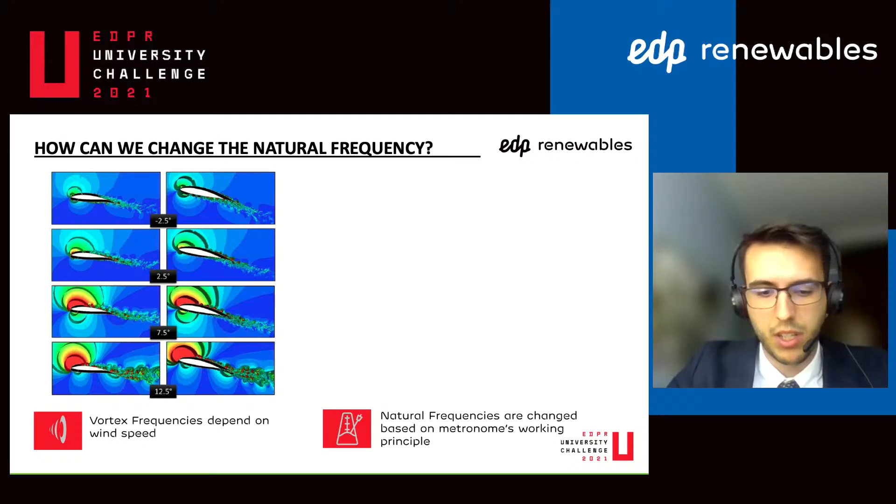We can achieve this by using a simple principle, similar to that of a metronome that is around in our daily life. The following animation shows this principle applied to a wind turbine blade.

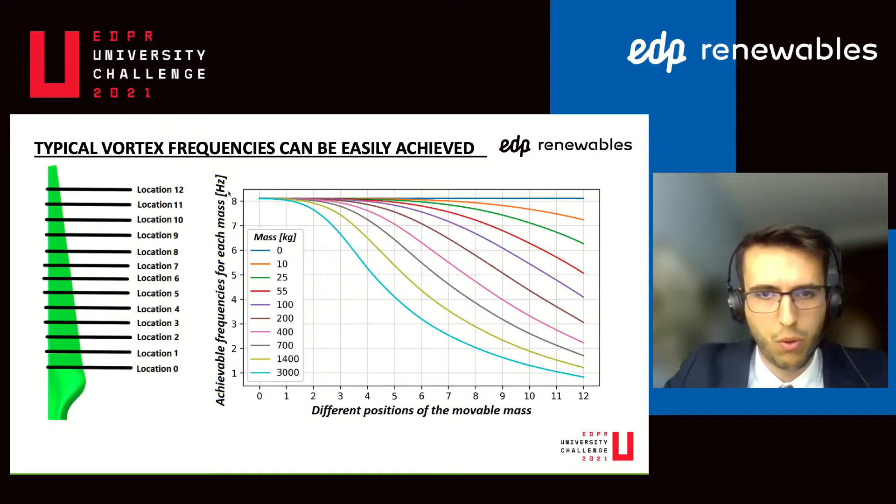With this simple system, oscillations can be maximized, and therefore the electricity produced. Many more mass-tuning studies have been made at multiple blade locations, showing that the typical vortex frequencies can be easily achieved. Those typical vortex frequencies are in the range from 3-4 hertz to 8-9 hertz.

Conclusions: the Canvas model has been used to identify the main partners of our project, such as EDP, Vortex Bladeless, European governments, and the European Union. Also, the most important activities like taking grants from the Green New Deal, research and development, and building a pilot plant, and key resources have been analyzed to propel the project forward.

The proposed project estimates that the installation and operational costs are significantly lower with respect to those of conventional wind turbines.

Rewind has a great advantage over other solutions dealing with retired wind turbine blades: the market and the infrastructure for the project already exist. This will also reduce costs related to the search for market needs, customers, etc. The largest cost of the project is the opportunity cost of not moving forward with it.

In conclusion, through innovation, circular economy, and reduced cost, we find a solution to the blade waste problem, while reusing an expensive infrastructure such as the electricity grid by producing electricity. Thanks for your attention.

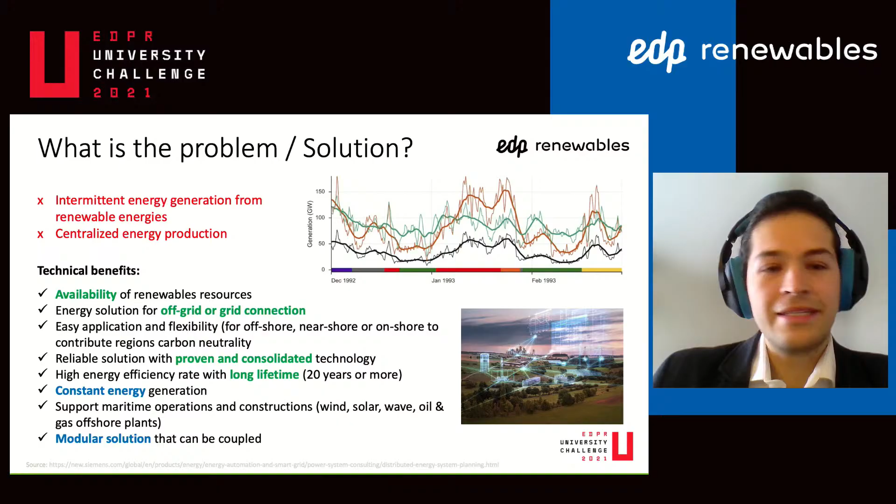Currently, all efforts are pointing toward beating climate change and decarbonizing energy production. For this, it is necessary to reduce renewables intermittency. With HyperRun, energy sources are available by combining 4 different energy conversion technologies that can work continuously, with the option to be off-grid or grid connected, and it is easily adaptable. And these are not the only problems we can solve.

Fossil fuel dependency, remote locations, and areas disconnected from the grid. Most renewables require large land areas for implementation and viability. This hybrid energy converter appears as an innovative renewable technology solution, and the design is compact, flexible, and energy efficient. That being said, many of you must be wondering how it works, and here HyperRun is presented.

This floating module is deployed in offshore conditions with strategically oriented PV solar panels on top and wind turbines on each side. This energy is enclosed with 2 Wells turbines extracting energy from the waves' oscillation. This solution has a hydraulic circuit as one of the main innovative components.

Water will enter the upper reservoir, producing energy with turbines due to the head created between the sea level and the conducting pressure pipe. And this is going to go to the bottom reservoir.

After that, water flow passes through the flexible pipe and check valve. Now part of the fluid can reach Water Air Transient Technology for energy storage, or WAT4S, that is based on water hammer to increase the pressure inside the WAT4S, allowing it to efficiently pump water to the surface and store energy as compressed air, without spending energy.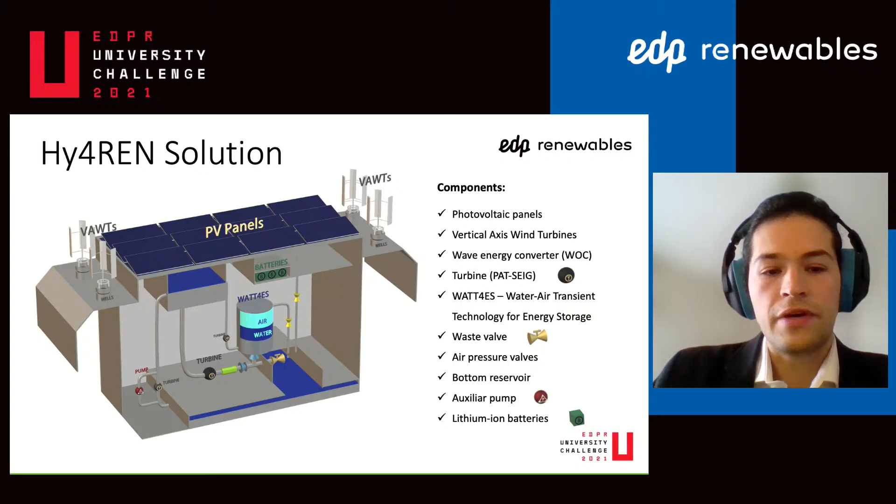Now the methodology is presented. First, we identified the limited flexibility of standalone renewables. The next step was to design the hybrid power plant with suitable technologies.

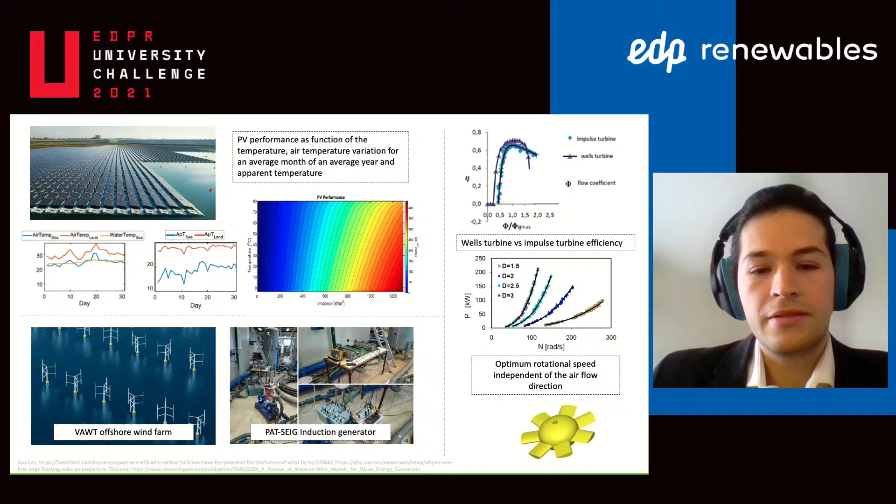To prove technical and economical feasibility, the following results are presented. According to average wind, solar, and wave conditions in Portugal, all components were sized for different renewable technologies in different modules, with the module maximizing efficiency.

We computed the power capacity, the energy produced per year, and the equipment required. In this slide are presented relevant numbers such as a positive NPV, a payback period of about 7.5 years that

can be reduced with a commercial scale, and an internal rate of return of 16%. Total installed power of each module is 23 kilowatts with a capacity factor of 62%.

In addition, EDP Renewables could avoid 120 tons of CO2 emissions per year. If 50 Hy4REN modules are working together, it can produce around 7 gigawatt-hours per year.

These are several applications and sectors that could benefit from this energy produced: for water production, supporting desalination processes, and in result, irrigation as well; for hydrogen production, powering electrolysis; for offshore operations and flexibility to be installed in different conditions, including lakes and dams also.

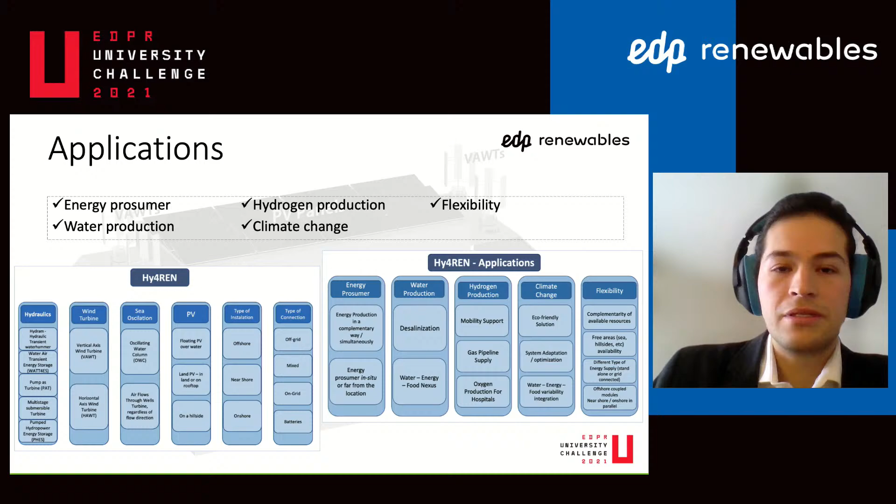Finally, Hy4REN, a profitable technology with low CapEx and OpEx, able to produce reliable energy, a module easy to install, adapt, and scale, the most innovative hybrid energy plant in the world. That is just one pilot project towards starting a new revolution in the energy market.

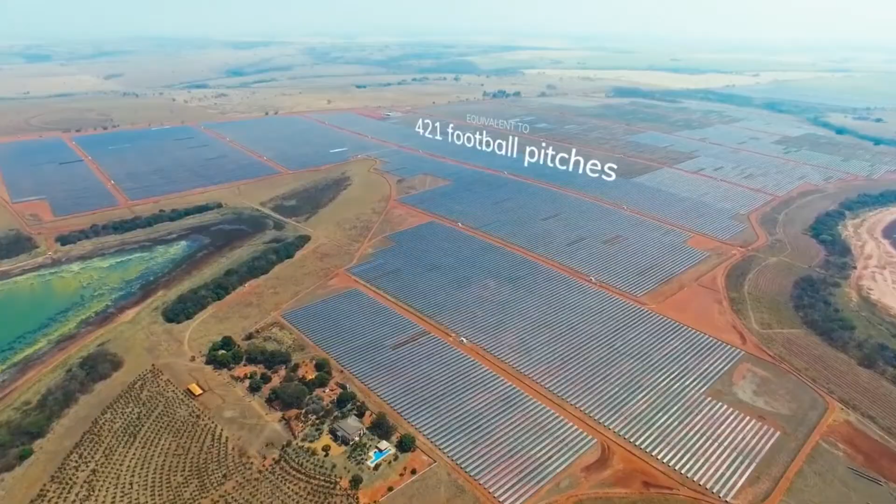EDP Renewables is launching the company's latest solar complex in Brazil. Pereira Barreto Solar Complex is the largest in operation in São Paulo state and the 5th largest in Brazil. The complex covers a total of 455 hectares and can generate up to 547,000 megawatts hour per year.

That's enough to power a city of approximately 750,000 people. In just 1 year, the photovoltaic complex will stop more than 150,000 tons of CO2 from being emitted into the atmosphere. It'll also make a lasting contribution to the region's social and economic development.

At EDP, we believe that a sustainable future begins with the choices we make today. And we're changing tomorrow now.

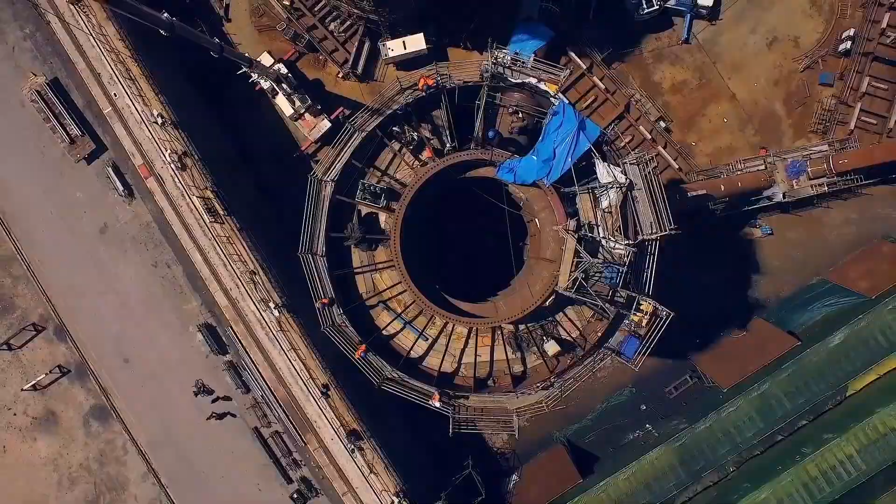This is a new way of generating energy and an important step to fight against climate change. Portugal enters a new era with an internationally acclaimed solution in the production of offshore renewable energy. The Wind-Float Atlantic project, formed by Ocean Winds, Repsol and Principle Power, is the first floating wind farm in continental Europe, just off the coast of Viana do Castelo.

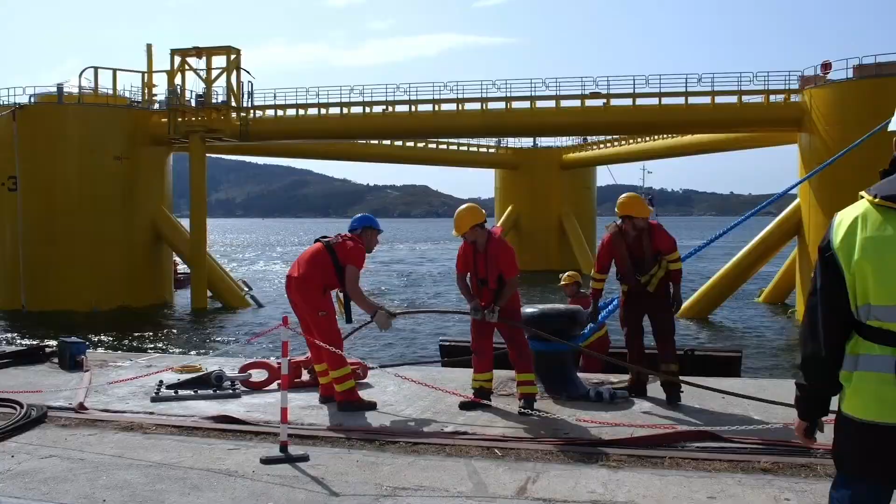This floating wind farm will allow the optimization of natural resources and will speed up the commercial deployment of this innovative technology. Wind-Float Atlantic is an example of a more sustainable future for mankind, with the largest turbines ever installed on floating platforms. The total installed capacity of 25 megawatts will provide sufficient energy to 60,000 people throughout the year.

This energy promises an endless source. The potential of wind is immense, and this renewable energy is an essential part of the worldwide decarbonization strategy, free of CO2 emissions. The Wind-Float Atlantic project is the future we envision.

Our mission has begun, and we will continue to nurture the power of nature to make our planet more sustainable. This is the beginning of a new era committed to enabling a better future.

Wind-Float Atlantic. Energy beyond the horizon.

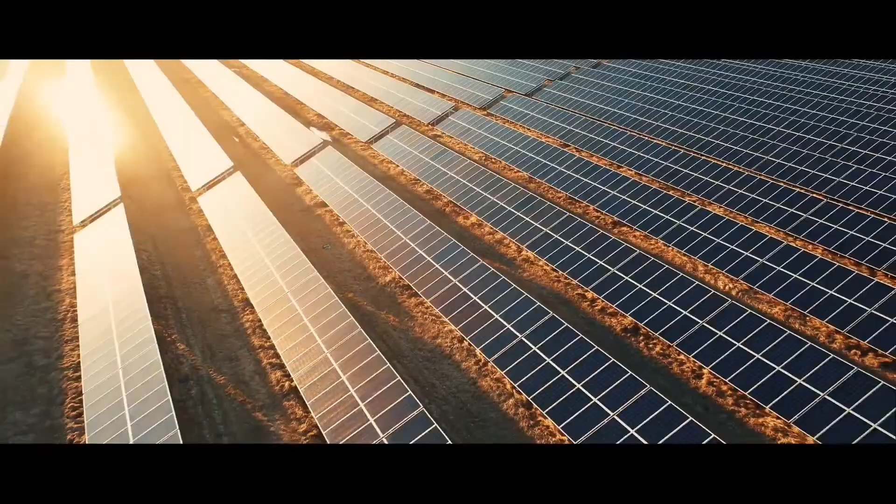Now, we are a bigger company with a stronger capacity. The sun, the wind, and the sea help us in our aim. They don't need to change. But we, humans, must keep evolving. And we have to do it now.

We must do it together, because our mission is not just EDPR's mission. It's the future that we all deserve. It's time to join our community, the community of change.

From today onwards, the sun will shine in a different way. It's about to be transformed into clean, renewable energy, and that energy will improve the lives of thousands of people. The planet can't wait any longer. Here at EDP Group, we're doing our bit. We're a global energy company committed to leading the energy transition and improving the lives of current and future generations.

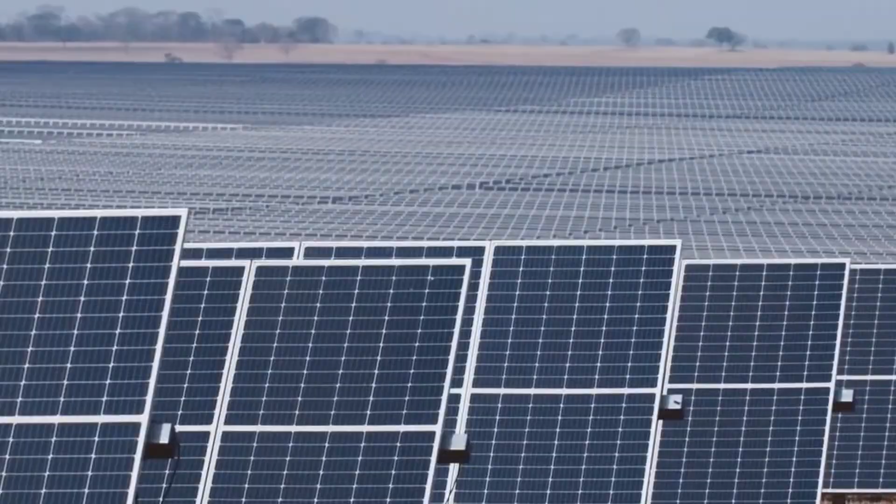EDP Renewables is launching the company's latest solar complex in Brazil. Pereira Barreto Solar Complex is the largest in operation in São Paulo state and the 5th largest in Brazil. The complex covers a total of 455 hectares and can generate up to 547,000 megawatts-hour per year.

That's enough to power a city of approximately 750,000 people. In just 1 year, the photovoltaic complex will stop more than 150,000 tons of CO2 from being emitted into the atmosphere. It'll also make a lasting contribution to the region's social and economic development.

At EDP, we believe that a sustainable future begins with the choices we make today. And we're changing tomorrow now.

This is a new way of generating energy and an important step to fight against climate change. Portugal enters a new era with an internationally acclaimed solution in the production of offshore renewable energy. The WindFloat Atlantic project, formed by Ocean Winds, Repsol and Principal Power, is the first floating wind farm in continental Europe, just off the coast of Viana do Castelo.

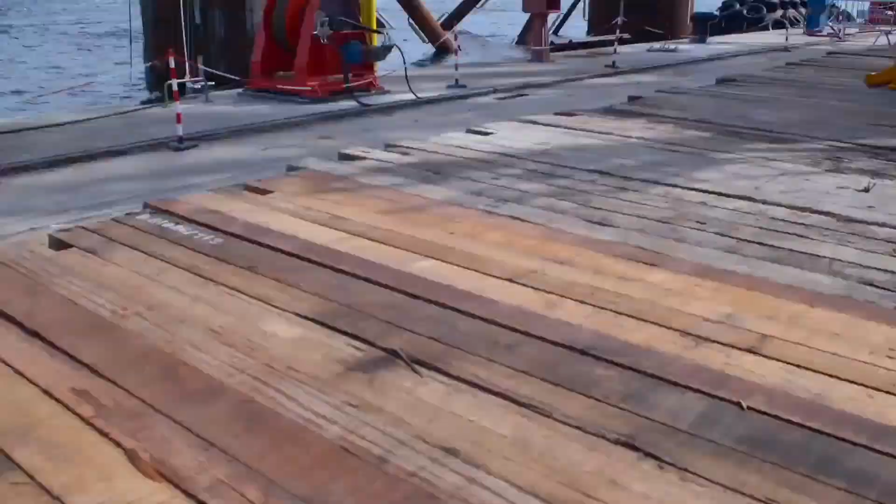This floating wind farm will allow the optimization of natural resources and will speed up the commercial deployment of this innovative technology. WindFloat Atlantic is an example of a more sustainable future for mankind, with the largest turbines ever installed on floating platforms. The total installed capacity of 25 megawatts will provide sufficient energy to 60,000 people throughout the year.

This energy promises an endless source. The potential of wind is immense, and this renewable energy is an essential part of the worldwide decarbonization strategy, free of CO2 emissions. The WindFloat Atlantic project is the future we envision.

Our mission has begun, and we will continue to nurture the power of nature to make our planet more sustainable. This is the beginning of a new era committed to enabling a better future.

WindFloat Atlantic. Energy beyond the horizon.